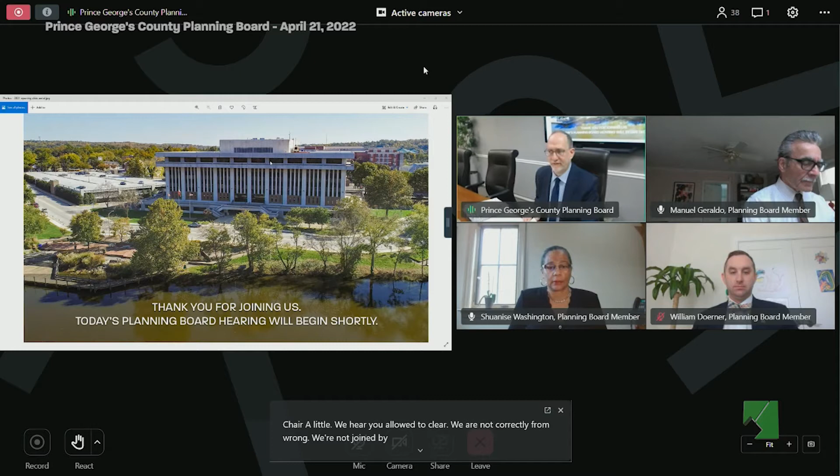We are not, correct me if I'm wrong, we are not joined by Vice Chair Bailey today, right? Okay.

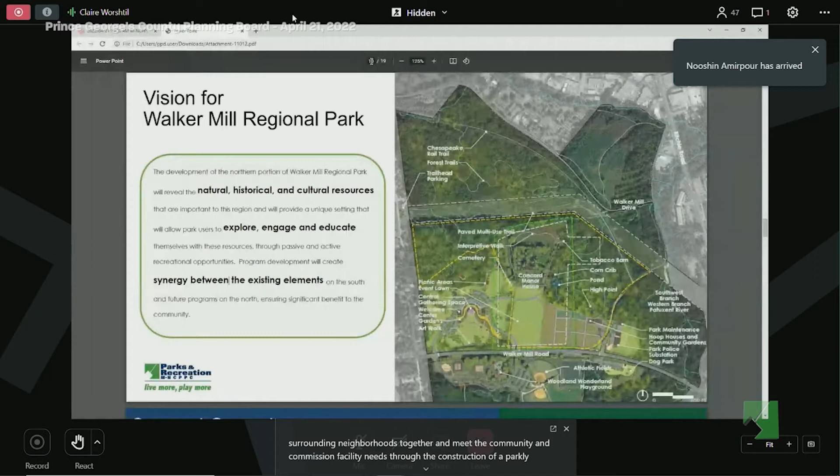We'll now talk a little bit more in depth about each zone. This is a rendering of a view from Walker Mill Road toward the historic Manor House and the grounds.

As per the protection of the Maryland Historic Trust easement, the master plan recommends maintaining the viewshed, but also enhances the visitor experience by renovating the house and other historic buildings on site, such as the corn crib and the stable, and creating a great lawn for future music and art events, as well as adding interpretive signage to tell the story of the people who once lived and worked at this location.

This is a rendering of the developable area of the western zone, which will be the most active part of the north side of the park.

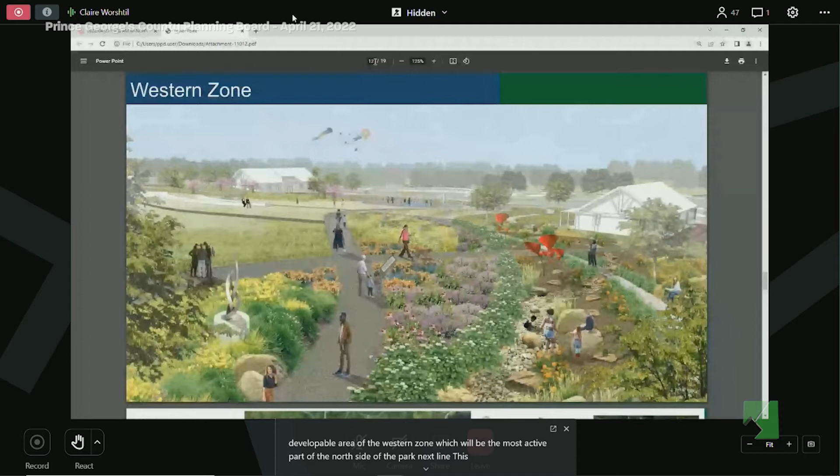This side will provide parking for the garden uses as well as the historic site. A welcome center and a small splash area will be surrounded by native gardens, children's gardens, an art walk, picnic pavilions, play spaces, and trails connecting this area to the rest of the park.

This is a rendering of the agricultural part of the eastern zone and shows urban agriculture at many scales, from community gardens to 1 acre to multi-acre plots.

This park will address the existing need and desire for local and urban agriculture, where the immediate community can learn techniques for larger scale farming and gardening with 1 to 3 acre plots or more in a more urban context. This model is currently being piloted at Watkins Regional Park, and there are opportunities here for farmers markets as well as educational activities and field trips.

This part of the park will also house a park police facility and maintenance facility. The community has requested a staff presence at this park, and the location inside the Beltway and close to Central Avenue provides operational efficiencies for our maintenance staff.

Walker Mill Road is a zone in itself. The roadway bisects the park, and bicycle and pedestrian safety is essential for the park's long-term success. We are envisioning a gateway to alert drivers that they are entering a park setting. Additional traffic calming measures like hawk signals and protected bicycle and pedestrian lanes are recommended, and the department has applied for a technical assistance grant to further study these measures, as this is a very keystone part of the plan.

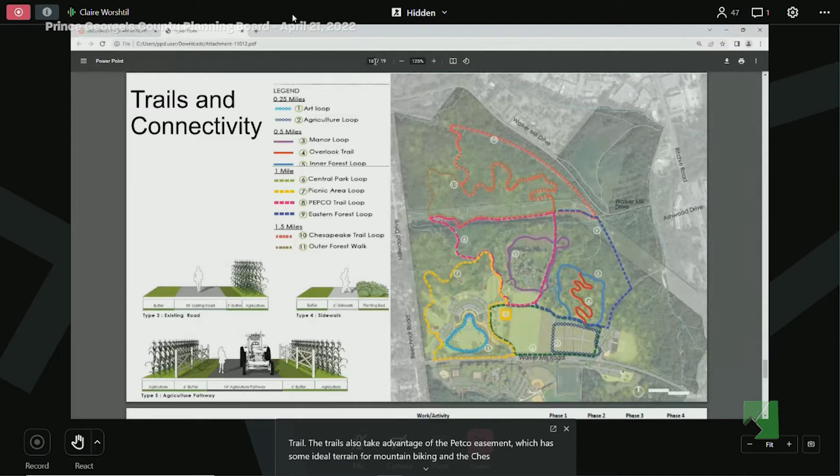Finally, the robust trail system is what ties all of this together. There are approximately 9 miles of new trail that will take users through the various sections of the park and connect to Walker Mill Road, Walker Mill Drive, and Central Avenue Connector Trail. The trails also take advantage of the Pepco easement, which has some ideal terrain for mountain biking, and the Chesapeake Beach Rail Trail goes through this site as well.

The plan breaks these improvements into 4 six-year phases, with the majority of the work happening in phases 1 and 2, so the first 12 years. Staff will further be refining the implementation plan in order to move into feasibility or design for certain aspects and make funding requests for others.

So thank you everyone for your time this morning, and we would love to answer any questions that you may have.

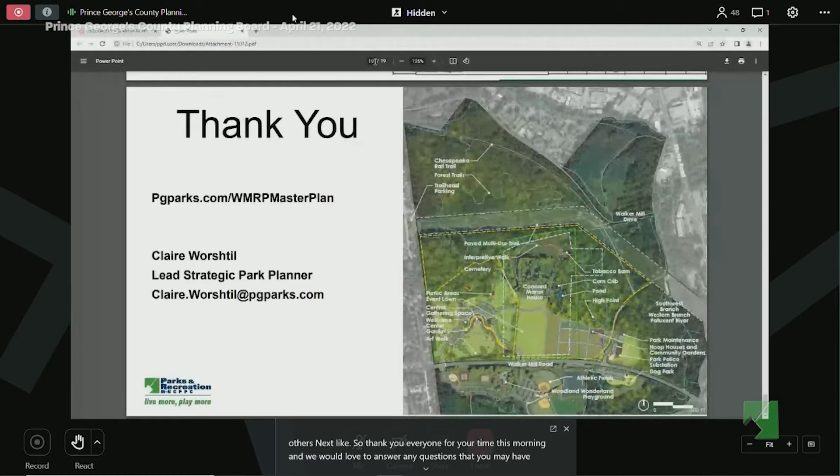Thank you, Ms. Worshtil. Let me turn to my commissioners and see if you have questions. Start with Commissioner Washington. I saw Commissioner Geraldo's hand go up. Oh, that's okay, Commissioner Washington could go first. No, I don't have any questions, but great job, team. Yes, it is a great job.

I have one question. So with the Chesapeake Beach Trail, that means you can walk from Watkins to Chesapeake Beach? Walker Mill. That trail is not completely finished. It exists in sections, so we would have a section of the Chesapeake Beach Trail that goes through this. But historically, it did go from Chesapeake Beach through Walker Mill and beyond. Okay, great, thank you.

Other questions? Commissioner Washington, Commissioner Doerner. Yeah, I have a few. I would say echo the comments of how great this is. And I think Commissioner Geraldo slipped up saying Watkins, because this is now going to rival Watkins Park in a lot of ways. This is great, this is really good. And it's awesome to see, especially like the Ninja course. I might have to shrink myself so I can participate on that once it's available.

I have 2 questions. One, I just want to know a little bit about the mountain biking reference, because we don't really have a whole lot of mountain biking opportunities in the county, and I want to know the plan for that. And then also on the agricultural plots, that looks fantastic to be doing this. I want to know if we're thinking about whether the production will be enough to potentially not just sell it in farmers markets, but also aid local schools, the county public school system, so we could have healthy options that come straight out of our parks and go on the tables for children in some of the school systems, or maybe it's more kind of smaller scale and more instructional.

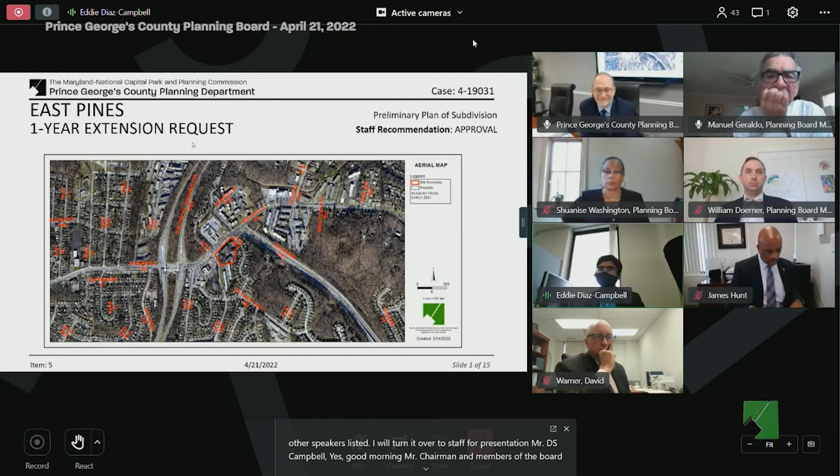Good morning, Mr. Chairman and members of the board. For the record, I am Eddie Diaz Campbell with the subdivision section. Item number 5 on the agenda is an extension request for preliminary plan of subdivision 4-19031 East Pines. This preliminary plan was approved by the planning board on May 28, 2020, and is valid through May 28, 2022. By letter dated February 14, 2022, the applicant requested a 1-year extension of the plan's approval. This is the applicant's first extension request. If approved, the preliminary plan will be valid through May 28, 2023.

The subject preliminary plan of subdivision approved 1 parcel to support development of 250 multifamily dwelling units and 25,000 square feet of commercial floor area. This preliminary plan was approved under the provisions of the prior zoning ordinance and subdivision regulations, and therefore, pursuant to Section 24-1704A of the subdivision regulations, extensions of time available under the prior subdivision regulations remain available. Section 24-119D of the prior subdivision regulations authorizes the planning board to grant an extension to the normal expiration of a preliminary plan of subdivision if certain criteria are met. For this preliminary plan, the criteria in Section 24-119D5A, Roman numeral 1 through Roman numeral 5, apply.

These criteria and their findings are listed in the staff memorandum. Staff found that all 5 criteria were met. Based on staff's findings and the project's eligibility for a 1-year extension as found in Criterion 5, staff recommends that the planning board grant a 1-year extension of preliminary plan of subdivision 4-19031 East Pines pursuant to Section 24-119D of the prior subdivision regulations. I do need to correct the record: the name of the applicant for this case is DGV Apartments LLC, not DVG Apartments as listed in the staff memo. This concludes staff's presentation.

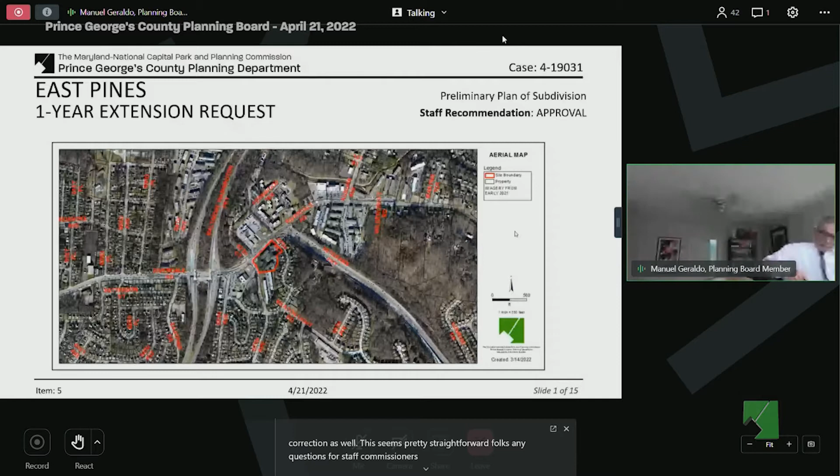Thank you for the presentation, and thanks for the correction as well. This seems pretty straightforward, folks. Any questions for staff, commissioners? No questions for staff. Let me turn it to the attorney for the case, Mr. Warner.

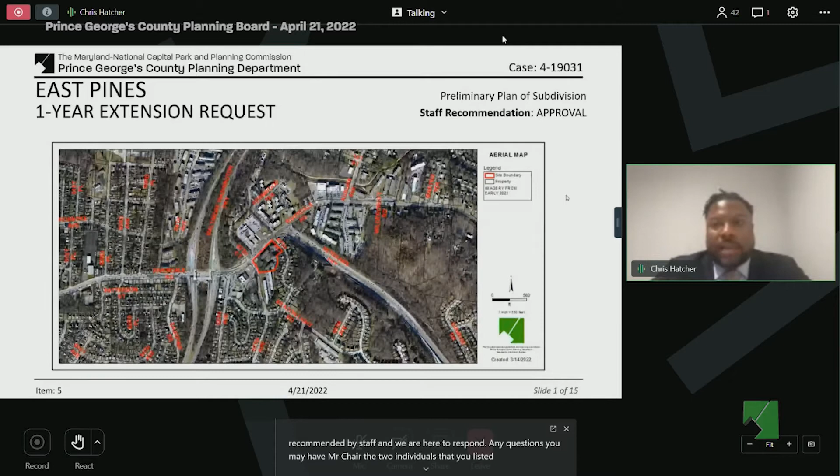Good morning, Mr. Chair, commissioners. For the record, my name is Chris Hatcher with CL Hatcher, with the office in Upper Marlboro, here on behalf of the applicant DGV Apartments LLC. I'd like to thank staff for working with us, and as you've seen in the staff report, this is a pretty complicated subdivision with assemblage of properties and requiring extensive coordination with MTA on the Purple Line location. With that, we respectfully request that the planning board approve the preliminary plan of subdivision extension as recommended by staff, and we are here to respond to any questions. Mr. Chair, the two individuals you listed are members of the applicant's team, and we're all here to respond to any questions, but don't necessarily need to say anything additional.

Great, thank you, Mr. Warner. Appreciate that. Are there questions for the applicant, for Mr. Warner? Hearing no questions. Are there any other questions from staff regarding this? Any further questions or anything to add? No, Mr. Diaz-Campbell, good to go. Okay, hearing no further questions from commissioners, I will look for a motion.

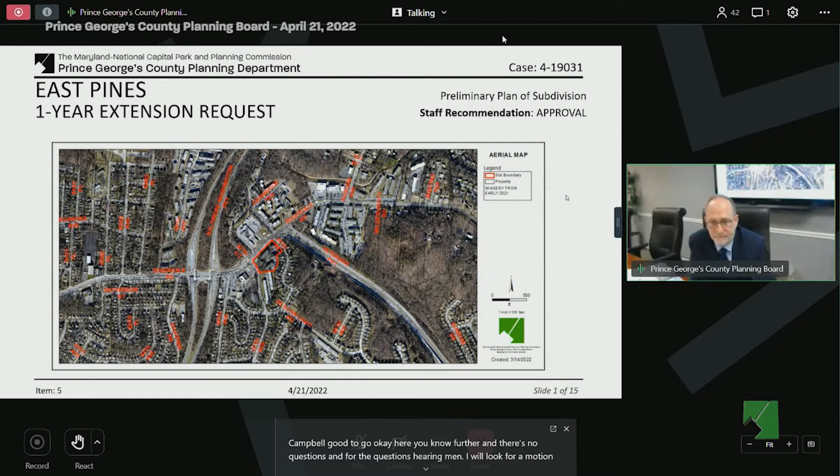Mr. Chairman, I move that we accept the recommendation of staff and approve the one-year extension for preliminary plan 4-19031. Thank you, we have a motion. Is there a second? I'll second the motion, noting the correction staff made regarding the name of the applicant. Thank you. We have a motion by Commissioner Washington, seconded by Commissioner Geraldo, with a notation to reflect the accurate name. Is there any discussion on the motion?

Hearing none, let me call the roll. Commissioner Washington votes aye. Commissioner Geraldo votes aye. Commissioner Doerner votes aye. And I vote aye as well. The ayes have it, 4-0. Thank you, Mr. Diaz-Campbell. Thank you, Mr. Warner.

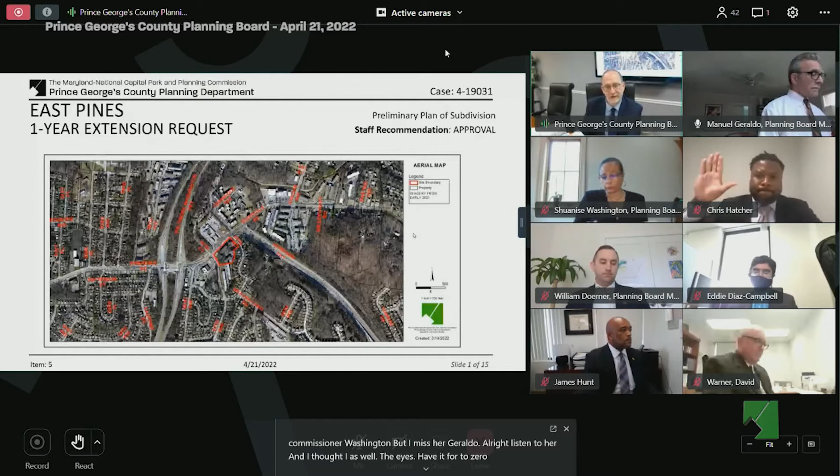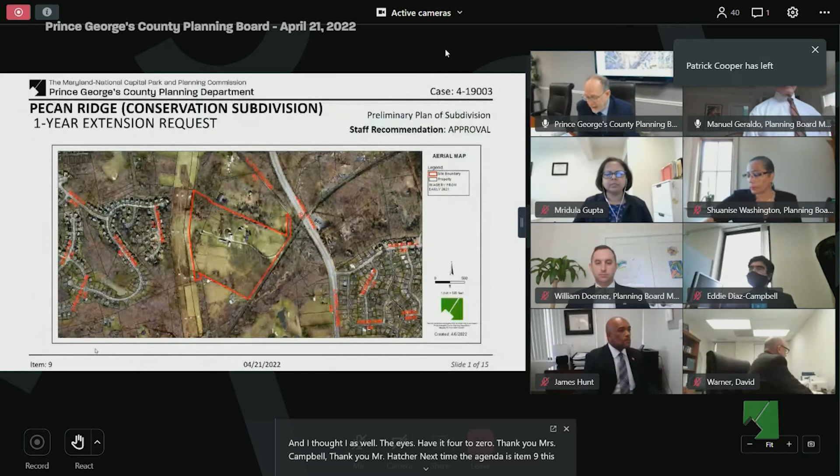Next item on the agenda is item 9. This is an extension request for a preliminary plan, 4-19003, Pecan Ridge Conservation Subdivision. Participating in this case is Mridula Gupta, and the attorney for the applicant is Ed Gibbs and Haller. We have additional speakers listed as well, who I assume are with the applicant team: Mr. Cintron, Mr. Villegas, and Mr. Howe. Let me turn it over to Ms. Gupta to begin the presentation.

Good morning, Mr. Chair and members of the board. For the record, I'm Mridula Gupta with the subdivision section. Item number 9 on the agenda is an extension request for preliminary plan of subdivision 4-19003, titled Pecan Ridge. This conservation subdivision was approved by the planning board on February 20th, 2020, and it is valid through March 12th, 2022. The applicant requested a one-year extension of the plan's approval, and if approved, the preliminary plan of subdivision will be valid through March 12th, 2023. This is the applicant's first extension request. The subject preliminary plan of subdivision approved 80 lots and 8 parcels for the development of 80 single-family dwelling units.

Section 24-1704A of the subdivision regulations states that subdivision approvals of any type remain valid for the period of time specified in the subdivision regulations under which the subdivision was approved. Extensions of time which were available under those subdivision regulations shall remain available. Preliminary plan of subdivision 4-19003 was approved under the prior subdivision regulations, and section 24-119D of the prior subdivision regulations authorizes the planning board to grant an extension to the normal expiration of a preliminary plan of subdivision if certain criteria are met. For this preliminary plan, the criteria under section 24-119A, Roman numeral 1 through Roman numeral 5, apply. These criteria and their findings are listed in the staff memorandum. Staff found that all 5 criteria were met. Based on staff's findings and the eligibility of a one-year extension as found in criterion 5, staff recommends that the planning board grant a one-year extension for preliminary plan of subdivision 4-19003, Pecan Ridge, pursuant to section 24-119D of the prior subdivision regulations. This concludes staff's presentation. Thank you.

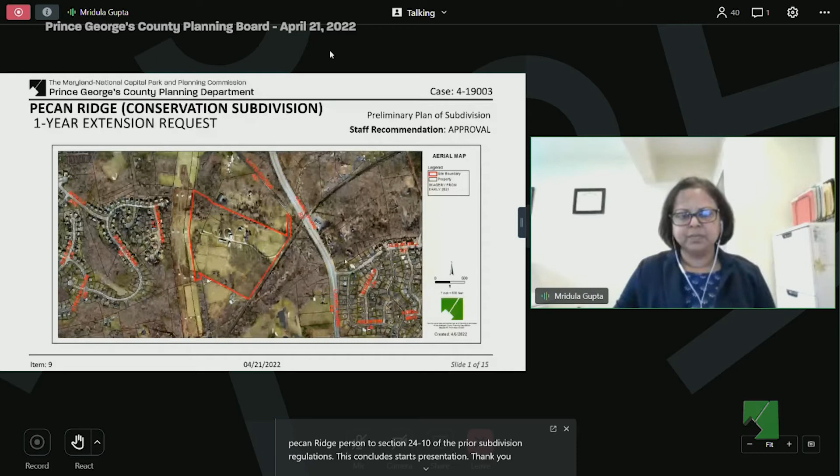Thank you, Ms. Gupta, for the clear presentation. Staff recommendation is to approve the extension. Questions from commissioners? Anything from my fellow board members? Pretty straightforward, no questions. Let me turn it over to the representative of the applicant, Mr. Gibbs.

Good to see you, Mr. Gibbs. Yes, good morning, Chair Shapiro. I have obviously appeared before you on many occasions when you were on the County Council, and it's a pleasure to be before you today. Congratulations and welcome. This is obviously my first appearance before the board since you became the new chair. So thank you very much.

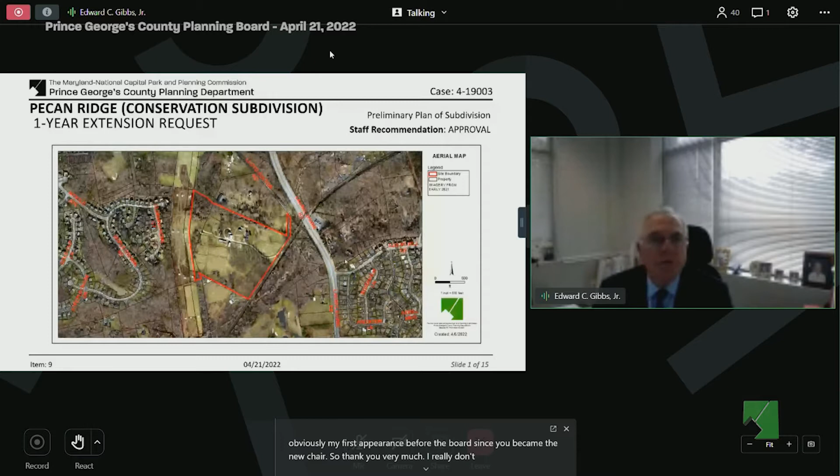I really don't have anything further that I could add. Everything is in the staff report and in our supporting documents. I do want to thank the staff for working with us on this, and very much appreciate the staff recommendation of approval. In particular, I'd like to thank Ms. Sherry Connor and your attorney, Mr. David Warner. So thank you very much. I have a number of people signed up. They're all part of either the applicant themselves or the applicant's team, and they have nothing further to say unless there are any questions. So thank you very much.

Thank you, Mr. Gibbs. Again, this is pretty straightforward, and I think for the public, I would say sometimes when cases like these feel so straightforward, we forget how much work is involved on the staff side in collaboration with the applicant to get us to the point where there are no issues of substance before us. So I recognize that, and I think I can speak for all my fellow board members in recognizing all the work that goes on behind the scenes. Are there questions for the applicant, for the attorney, from any of my fellow board members? Seeing none, let me look for a motion.

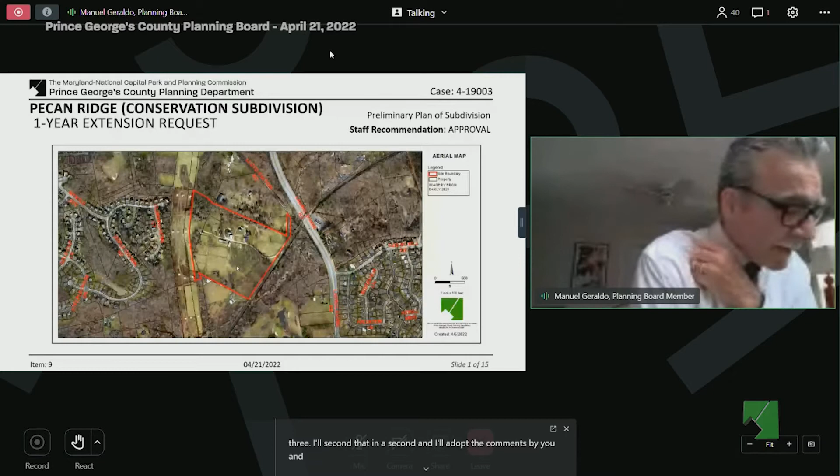Well, Mr. Chairman, I'll first associate myself with your comments and thank the team, because you're right, there is a lot of work that goes into this. And with that, I move that we adopt the recommendation of staff and approve the one-year extension for preliminary plan 4-19003. I'll second that and adopt. I'll second it, and I'll adopt the comments by you and by Commissioner Washington. Thank you. We have a motion by Commissioner Washington, second by Commissioner Geraldo. Any further discussion on the motion? Hearing none, I will call the roll.

Commissioner Washington. I vote aye. Commissioner Geraldo. I vote aye. Commissioner Doerner.

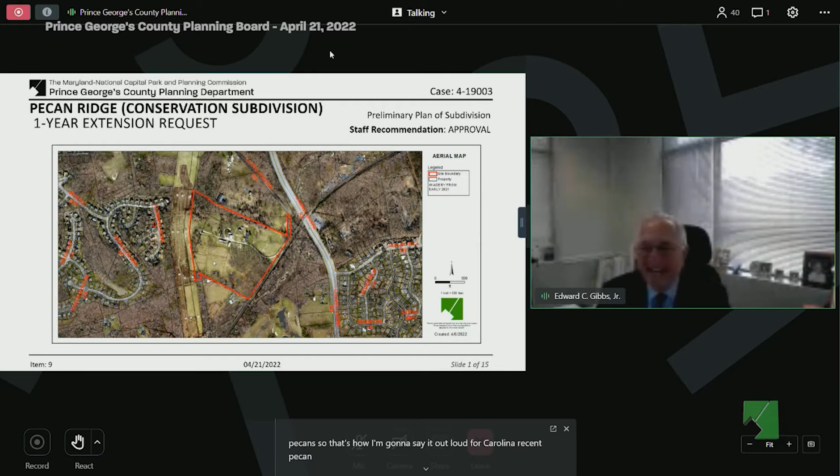Vote aye for Pecan Ridge, is how I would say it. I'll also note you can say pecan, pecan, or pecan. There's actually three recognized ways depending on where you are. It's not even north versus south, it's a distinction between the Carolinas and the Georgia, northern Florida areas. I'm always used to saying pecan, so that's how I'll say it. Well, I'm from South Carolina, and we say pecan.

Since you had to go there geographically, Commissioner, I think we have our first item for our commissioners retreat to debate, so we'll take this up another day. But thank you. So I vote aye as well. The ayes have it, 4-0.

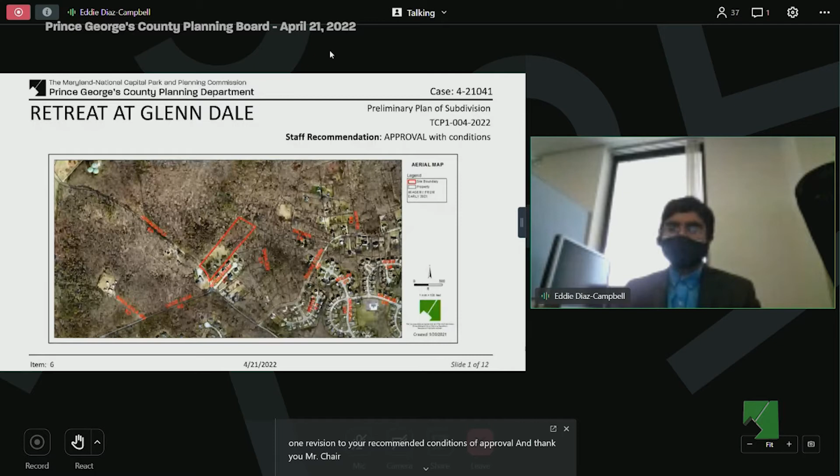The subject project proposes 13 lots for the development of 13 single-family detached dwellings. As a matter of housekeeping, staff has received one item of additional backup, received before the noon deadline on April 19. This is a letter from the applicant requesting one revision to the recommended conditions of approval. Thank you, Mr. Chairman, for noting that. Next slide, please.

Can I hold you right there? Because I believe we have two records. I'm not sure that it matters, but I have that as well. Yes, two items, the other one being the rendering. Excuse me, thank you, Mr. Gaskell. Keep going.

The site is located in the northern part of Prince George's County within Planning Area 71A and Council District 4. Next slide, please. More specifically, the site is located on the north side of Springfield Road, approximately 115 feet northwest from the intersection of Springfield Road and Good Luck Road. Next slide, please.

The zoning map shows that the property is in the rural residential, or RR zone. To the east are developed and undeveloped prior subdivisions also in the RR zone. To the south, across Springfield Road, is a parcel zoned RR, the site of the historic Perkins Chapel and other places of worship. Further south are residential subdivisions in the residential estate, or RE zone. To the west and north is the Patuxent Research Refuge in the reserved open space, or ROS zone. Next slide, please.

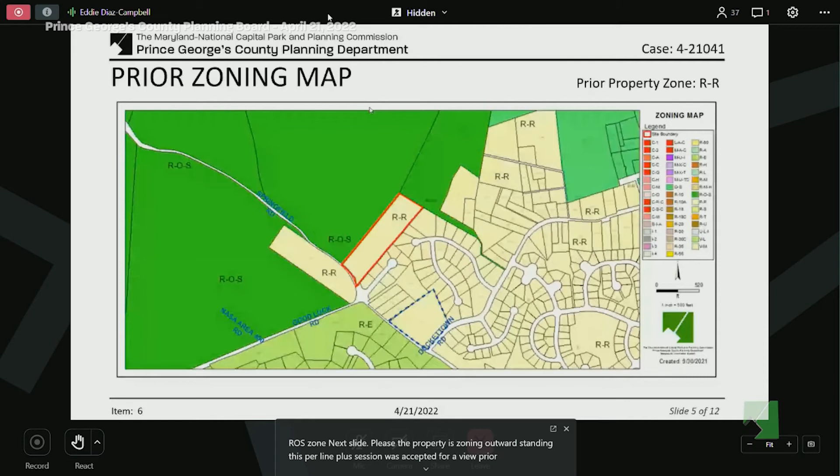The property zoning notwithstanding, this preliminary plan of subdivision was accepted for review prior to April 1, 2022, and is therefore reviewed under the prior zoning ordinance and subdivision regulations, pursuant to Section 24-1703A of the subdivision regulations. Under the prior zoning ordinance, this site was also in the RR zone. This preliminary plan of subdivision was therefore evaluated according to the former standards of the RR zone rather than the current standards. Next slide, please.

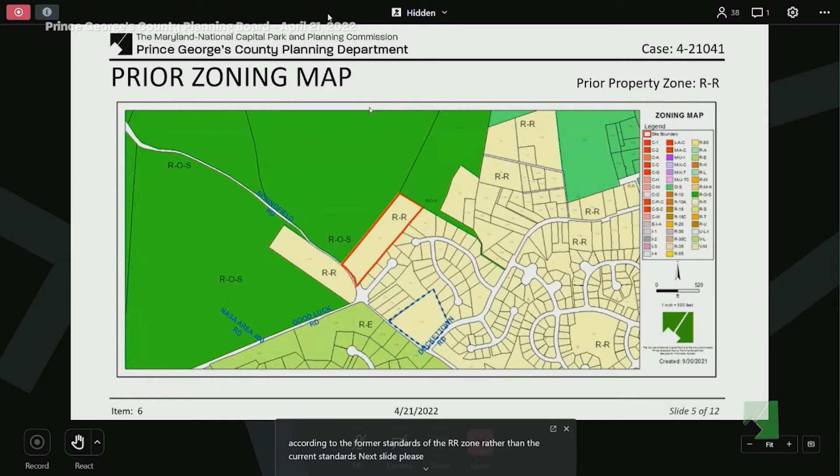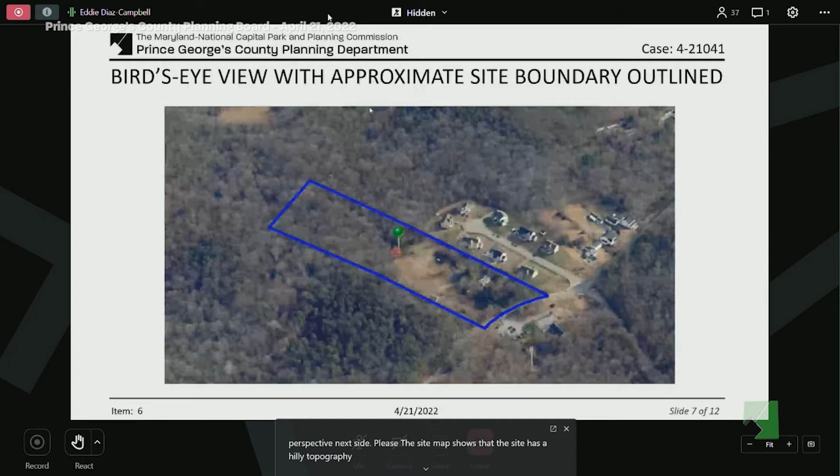The analysis performed by staff found that these intersections would operate adequately under total traffic conditions. Next slide, please.

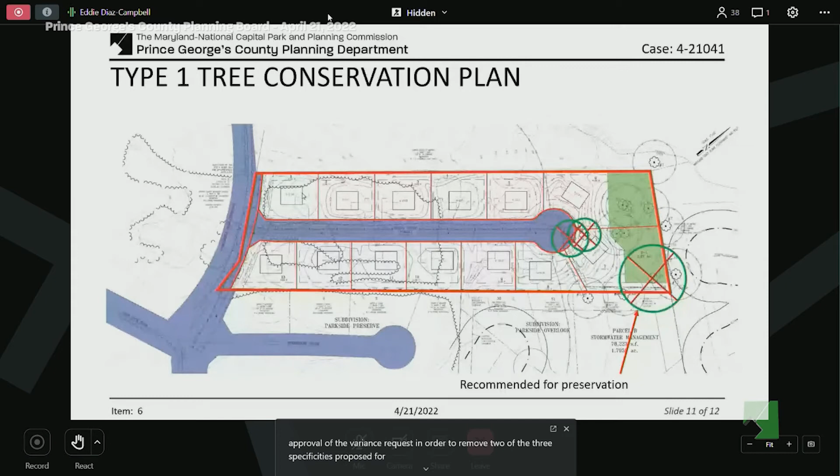Next slide, please. In conclusion, subdivision staff recommends that the planning board adopt the findings and approve preliminary plan of subdivision 4-21041 Retreat at Glenn Dale, as well as Type 1 tree conservation plan TCP1-004-2022, and a variance from section 25-122B1G for removal of 2 specimen trees, subject to conditions contained in the staff report.

The applicant has communicated 1 proposed revision to conditions of approval recommended in the report, which is included on the record. The purpose of this revision is to delete the requirement that an approved stormwater management concept plan be submitted prior to certification of the preliminary plan. Because no regulated environmental features will be affected by the stormwater facilities shown in the plan, staff agrees that the approved stormwater management concept plan may be submitted prior to approval of a Type 2 tree conservation plan, which is a standard requirement. Staff concurs with the applicant's proposed revision.

The associated findings in the staff report will be revised for the resolution. This concludes staff's presentation.

Thank you, Mr. Diaz-Campbell. Are there questions for staff on this case? And just to be clear, what you're recommending is approval, but with 1 change to the conditions. That's it, which you just described.

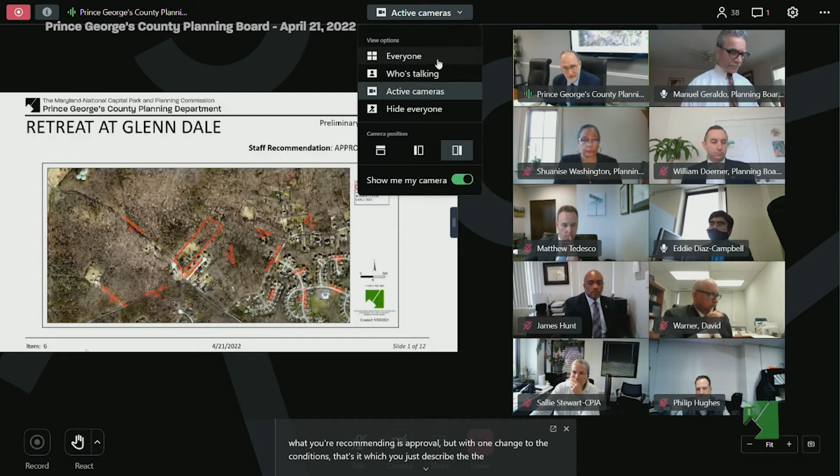The 3rd specimen tree, is that a separate recommendation? So the staff report recommends partial approval of the variance, so that recommendation from the staff report does not need to change. But yes, there's 1 condition from the staff report not related to the variance, which staff is recommending deletion of for the applicant's request.

Thank you, Mr. Diaz-Campbell. So let me turn to my fellow commissioners with any questions. I have none. Commissioner Washington, Board Member Doerner, no questions?

No questions. I'll just point out that what Mr. Diaz-Campbell was saying is that one of the recommendations in the list in the staff report actually says preserve that specimen tree. So that's why it's a partial recommendation of approval of the variance. Okay, thank you for that. It's already covered in there. All right, thanks for that. Appreciate it. Okay, no questions for staff.

Let me turn to the attorney for the case, Mr. Tedesco. Good morning, Mr. Chairman. It's a pleasure to be before you. Good morning, fellow commissioners and staff. Mr. Chairman, let me take this opportunity. This is my first appearance before you after your recent appointment. I just want to say congratulations and echo my colleague, Mr.

Gibbs's sentiments with welcome, and it's nice to have you. I also want to thank Mr. Diaz-Campbell for his review of this application, his excellent staff report and his presentation this morning, as well as the environmental planning staff who worked with us on this application.

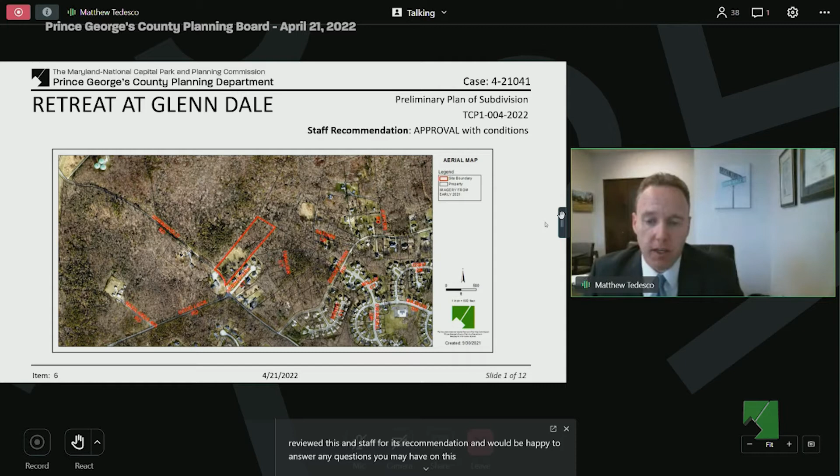Thank you, Mr. Tedesco. Let me turn it over to my colleagues to see if you have any questions. I have no questions. No questions, thank you. Ms. Doerner, no questions? No questions. Thank you, so we have no questions, and I as well have no questions.

This feels pretty straightforward. You were aligned with staff. There's one change to conditions, and staff is in agreement with that. If there's nothing else, Mr. Tedesco, let me turn to my commissioners for a motion.

Mr. Chairman, I move that we adopt the findings of staff and approve preliminary plan 4-21041 and TCP 1-004-2022, partial approval of variance to section 25-122B1G, covering the two specimen trees.

As communicated by staff, along with the associated conditions, and as further modified by applicant exhibit number 1, and would also ask that we incorporate in the adoption the modified findings as outlined by staff related to the deletion of condition number 8.

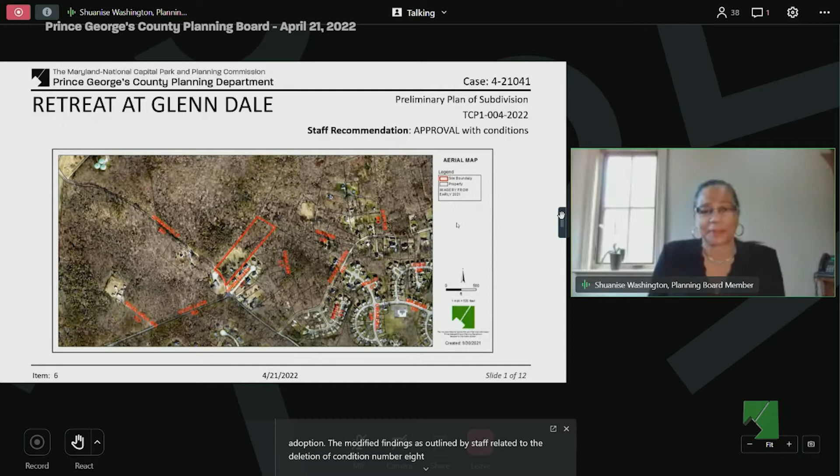Second. Thank you. We have a motion by Commissioner Washington, a second by Commissioner Geraldo. Any discussion on the motion? Hearing none, I will call the roll.

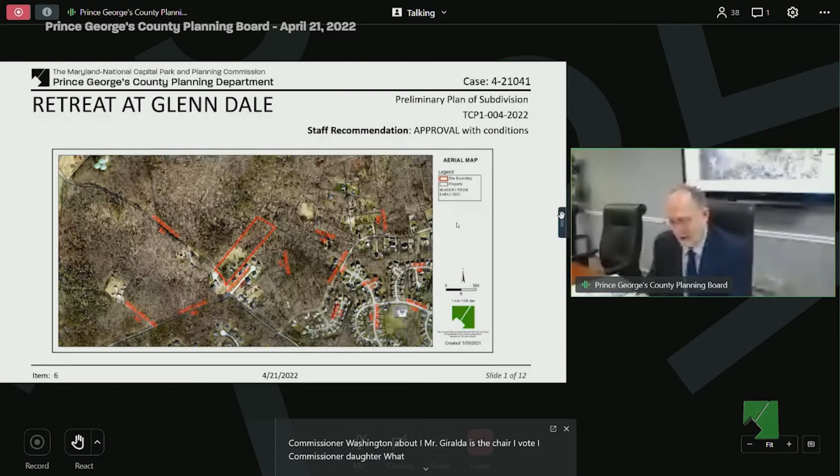Commissioner Washington votes aye. Commissioner Geraldo, Mr. Chair, I vote aye. Commissioner Doerner votes aye, and I vote aye as well. The ayes have it, 4-0.

Thank you, Mr. Diaz-Campbell. Thank you, Mr. Tedesco and team. Thank you, Chairman. Commissioners, do we need a break? Are you okay for a few minutes? Are you okay?

All right, good. Okay, so the next item is item 8. This is a preliminary plan of subdivision 4-21032, Hyattsville Crossing.

Participating in this case is Mr. Diaz-Campbell again, and for the applicant we have attorney Tom Haller. I'm present, Mr. Chairman. Thank you. We have some proponents as well. I'm assuming these are members of the applicant's team, though there's a representative of the city of Hyattsville, Taylor Roby. The other proponents are Mr. Bickle, Mr. Gingles, Mr. Lenhart, and Ken Dunn with Soltez.

Mr. Haller, do you want the representative of the city of Hyattsville to speak first, or should I turn it to you to take it away? No, I'll speak after Mr. Diaz-Campbell provides the staff presentation. I'm sorry, I skipped ahead. Let me turn to Mr. Diaz-Campbell, who will give the staff presentation first. Thank you.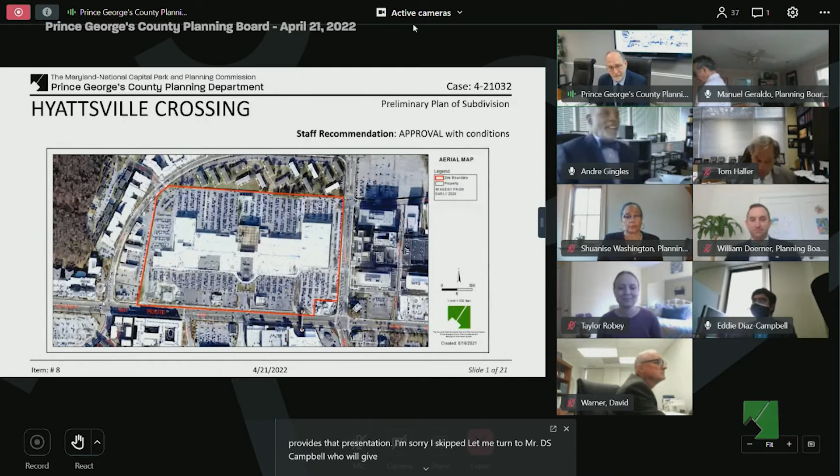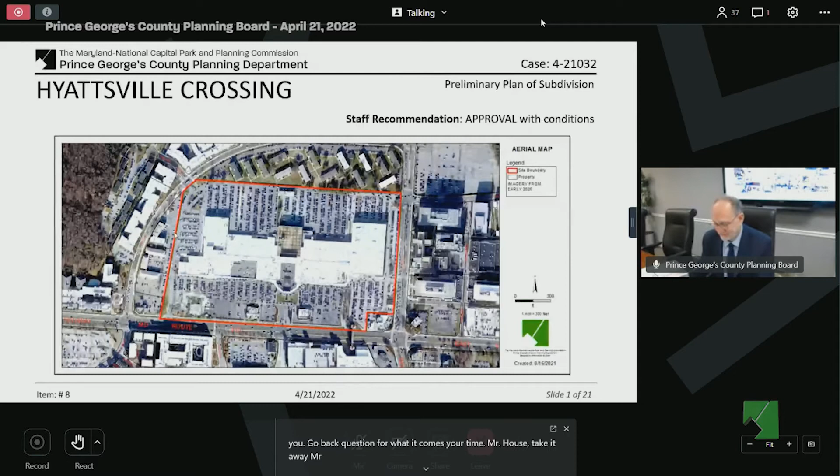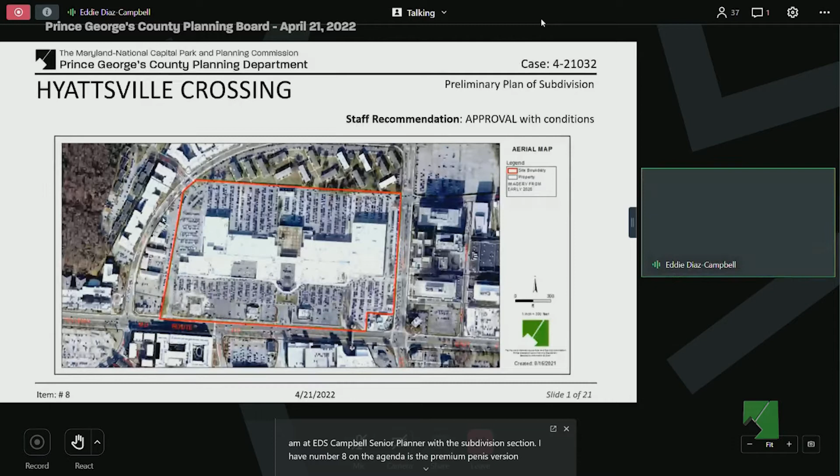Thank you, Mr. Chairman. For the record, I am Eddie Diaz-Campbell, Senior Planner with the Subdivision Section. Item number 8 on the agenda is the preliminary plan of subdivision for Hyattsville Crossing, 4-21032. The subject project proposes 3 parcels for 380 multifamily dwelling units, as well as 1,068,471 square feet of commercial floor area to remain.

The property is the site of the Mall at Prince George's, and there are specific recommendations for the site given in the 2016 Prince George's Plaza Transit District Development Plan, which will be discussed in this presentation. As a matter of housekeeping, staff received one item of additional backup, which was received before the noon deadline on

May 19. This is a letter from the applicant requesting revisions to the recommended conditions of approval. Though staff is not in agreement with the revisions requested in this letter, following its submittal, staff and the applicant did reach agreement on an alternative set of revisions, which I will read into the record at the end of this presentation. Next slide, please.

The site is located in the northwestern part of Prince George's County, within Planning Area 68 and Council District 2. Next slide, please.

More specifically, the site is located on the north side of Maryland 410 between Toledo Terrace and Belcrest Road. Next slide, please.

The zoning map shows that the property is in the core area of the Regional Transit-Oriented High Intensity Zone, or RTOHC zone. The property is surrounded by other properties that are similarly zoned RTOH, with properties in the core area shown in dark blue on this slide, and properties in the edge area, or RTOHE, shown in light blue. Next slide, please.

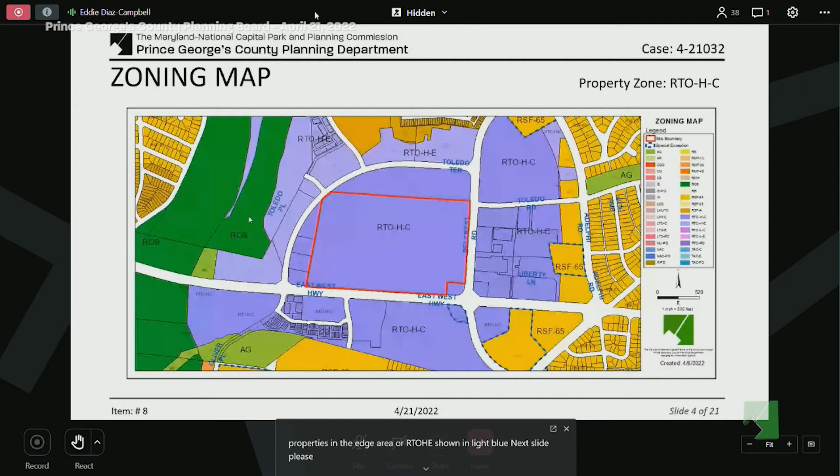The property zoning notwithstanding, this preliminary plan subdivision was accepted for review prior to April 1, 2022, and is therefore reviewed under the prior zoning ordinance and subdivision regulations, pursuant to Section 24-1703A of the subdivision regulations. Under the prior zoning ordinance, this site was in the mixed-use infill, or MUI zone. This preliminary plan subdivision was evaluated according to the standards of that zone.

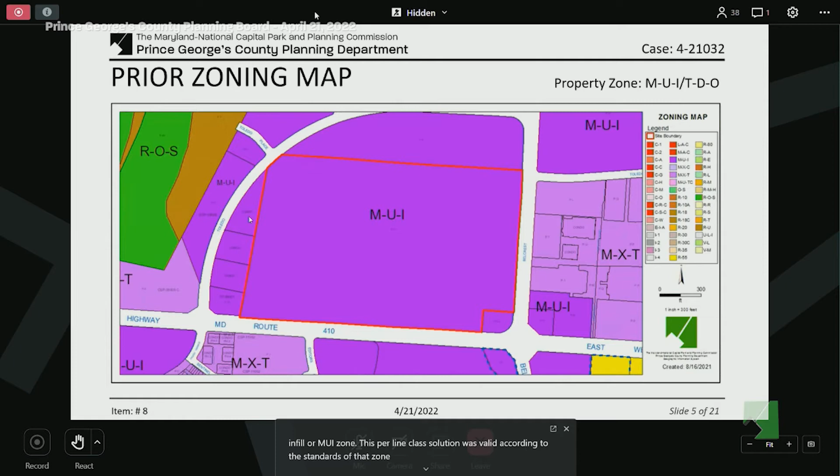Next slide, please. Under the prior zoning, the property was also in the Transit District Overlay Zone, or TDO, associated with the 2016 Prince George's Plaza Transit District Development Plan. The TDDP includes design standards for the TDO, which will be discussed further in this presentation. Next slide, please.

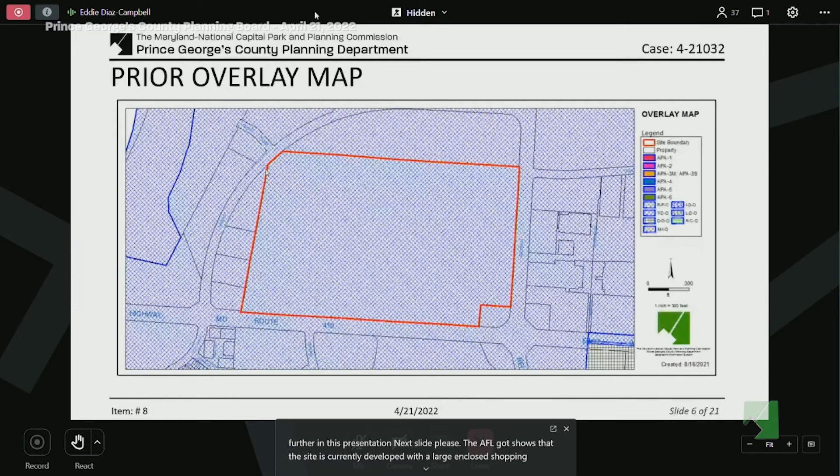The aerial photograph shows that the site is currently developed with a large enclosed shopping mall and several pad sites and outbuildings. As part of the proposed development, the applicant will raze the northernmost building, former auto center, and part of the mall building, the former J.C. Penney's, for a total of 60,546 square feet of commercial gross floor area to be removed, resulting in the 1,068,471 square feet of commercial floor area to remain. The aerial photograph also shows the uses surrounding the property.

The master plan right-of-way map shows Maryland 410, an arterial road, and Belcrest Road, a collector road, and Toledo Terrace and Toledo Road, which are primary roads. These roads are included in the 2009 Master Plan of Transportation. No right-of-way dedication is required for any of these existing roadways.

In addition to those roads listed in the 2009 MPOT, the 2016 TDDP amended the MPOT to include a master plan local municipal road known as Toledo Road Extended, which is shown by the black dotted line on this slide. The TDDP specifies that this road is located on the north side of the mall property. It also specifies that the road is intended to formalize the existing drive aisle in this location, which connects between the mall entrance at Belcrest Road to the east and the mall entrance at Toledo Terrace to the west.

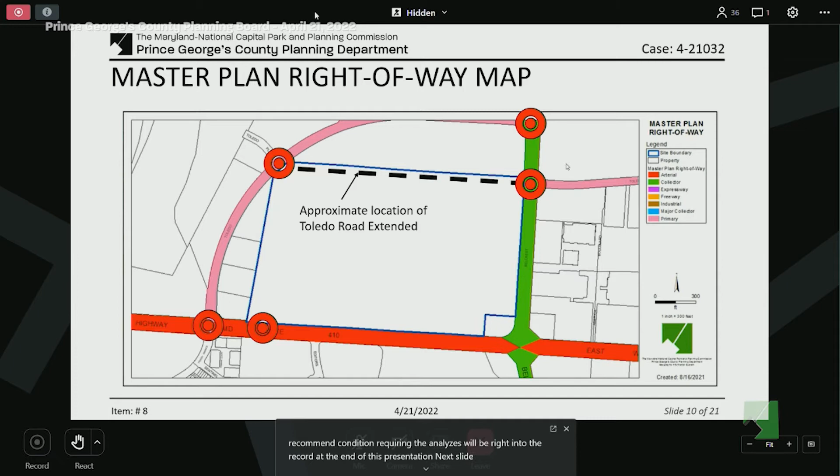The first easement wraps south around Parcel 2 in order to serve Parcel 3. The second extends across the northern boundary of the site to ensure Parcel 2 is served from both the northeast and northwest site entrances. As previously discussed, the second easement needs to be modified to cover the existing drive aisle, and it will ultimately be replaced by public right-of-way once future development improves Toledo Road Extended to a public standard along its full length and the City of Hyattsville is ready to accept dedication.

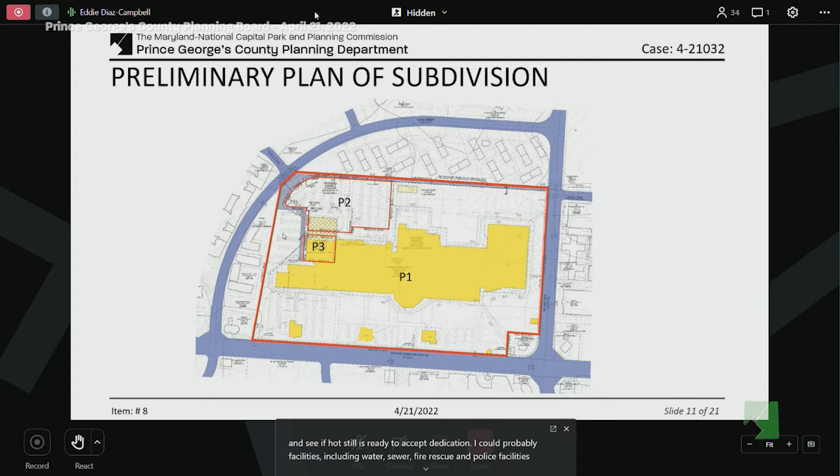However, Section 24-121A3 of the prior subdivision regulations requires that when lots are proposed on land adjacent to an arterial road, they shall be designed to front on an interior street or service road. No interior streets or service roads are proposed, so the applicant filed a variation request from Section 24-121A3 to allow the existing access points to remain.

Staff recommends approval of this variation request, as described in Finding 7 of the staff report.

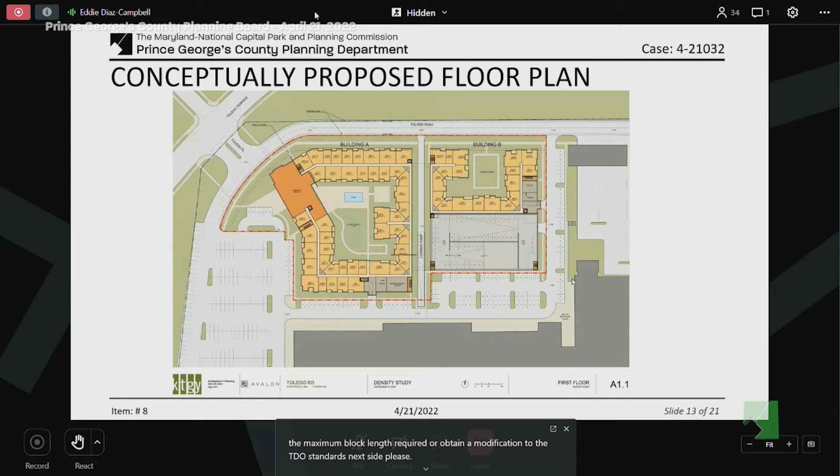This slide shows the conceptually proposed building massing from the northeast.

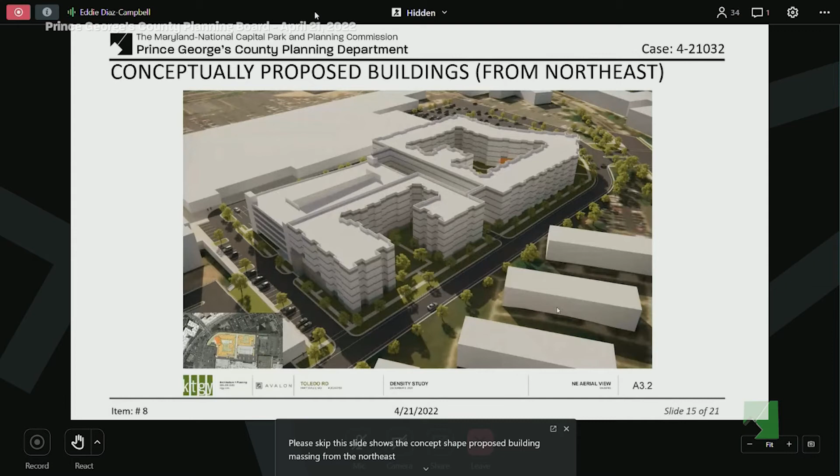Because residential development is proposed, mandatory dedication of parkland is required with the preliminary plan application, pursuant to Section 24-134 of the prior subdivision regulations. The applicant is proposing to meet the requirement with private on-site recreational facilities within the multifamily buildings, as permitted by Section 24-135B.

The TDDP also includes specific recommendations for Toledo Road Extended, which are illustrated with the street section on this slide. The TDDP envisions Toledo Road Extended as a two-lane roadway with on-street parking and bike lanes. However, it also stipulates that the facilities provided between the curbs are at the discretion of the City of Hyattsville.

The TDO requires a frontage zone on either side of the roadway, which must be a minimum of 20 feet in depth, and include within that depth a buffer zone, tree and furniture zone, sidewalk clear zone, and retail zone. Where no retail zone is proposed along the street, as is the case here, the retail zone is simply the remaining area between the clear zone and the building facade.

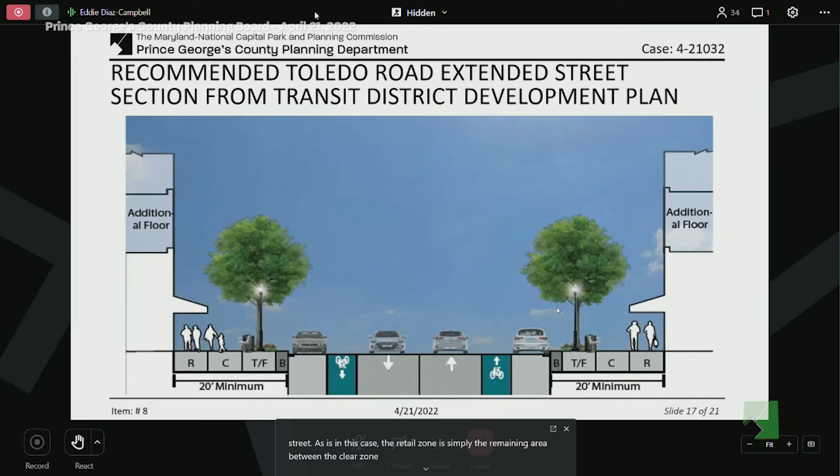The frontage zone, with the staff recommended modifications, will include all of the subzones required by the TDO. The applicant may still request a reduction in the minimum frontage zone depth at the time of detailed site plan from 20 feet to 18 feet, and if so, this street section will be able to accommodate such a reduction.

With this project, the street section shown here will be established only for the frontage of the new multifamily buildings on Parcel 2. However, staff expects that this street section will also be used for future development along Toledo Road Extended, east of the multifamily buildings.

Redevelopment of the property to the north of the mall will have to provide the frontage zone on the north side of Toledo Road Extended, and as such redevelopment may also provide additional width to the travelway.

Because the new street section will only be established for the frontage of the new multifamily buildings on Parcel 2, the applicant has proposed, and staff has recommended, additional interim improvements to Toledo Road Extended on Parcel 1 in order to ensure functionality of the roadway, while redevelopment of the rest of the road is still in the future.

The applicant proposed changes to the stop signs near the northwest entrance, and staff has recommended sharrows along the roadway where the bike lane is not yet to be implemented. Staff has also recommended that all existing center lines, speed bumps, and crosswalks be restriped.

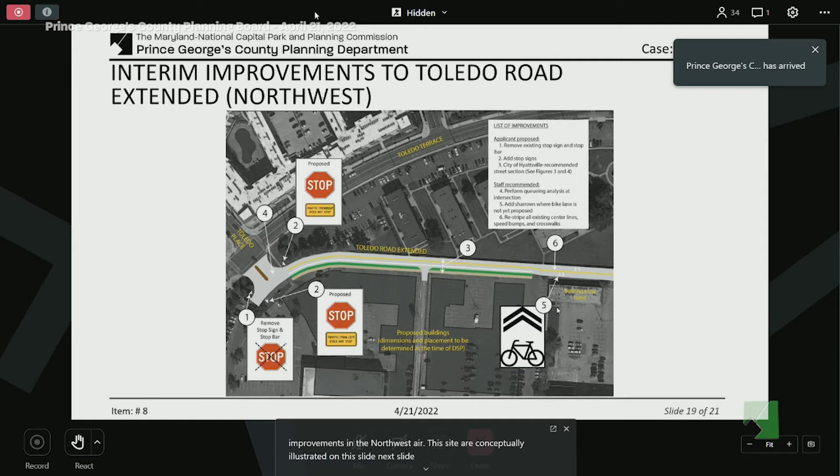The staff recommended improvements in the northwest area of the site are conceptually illustrated on this slide. Note that the sharrows on Parcel 1, the bike lane in front of Parcel 2, and the frontage zone on Parcel 2 are also recommended to meet the requirements of on-site bicycle and pedestrian adequacy in centers, pursuant to Section 24-124.01 of the Prince George's County Subdivision Regulations.

Off-site improvements for bicycle and pedestrian adequacy required by Section 24-124.01 have also been proposed by the applicant and are found acceptable by staff. I will read a modified condition to the record which addresses all the required off-site and on-site BPIS improvements.

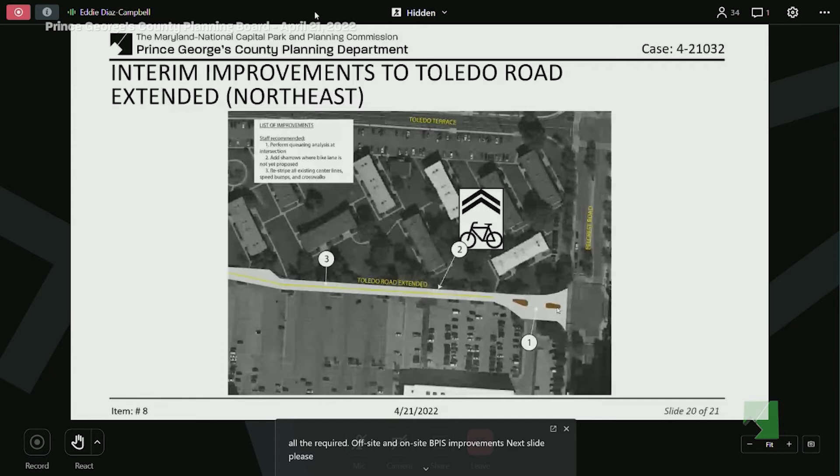In conclusion, subdivision staff recommends that the planning board adopt the findings and approve preliminary plan subdivision 4-21032 Hyattsville Crossing, as well as a variation from Section 24-121A3, subject to conditions contained in the staff report.

The applicant communicated proposed revisions to the conditions of approval recommended in the report, which are included on the record. As stated in the beginning of this presentation, staff was not in agreement with all of the proposed revisions. However, staff and the applicant worked to determine additional revisions which were acceptable to both the applicant and staff. I will read those into the record now.

Staff recommends that Condition 1A read as follows. 1. Prior to signature approval of the preliminary plan of subdivision, the plan shall be revised as follows. A. Increase the width of the public access easement along the northern border of Parcel 2 from 25 feet to 38 feet. The public access easement on Parcel 1 shall be expanded or modified as needed to ensure the existing interim drive aisles from Belcrest Road to Parcel 2 are also encompassed by the easement. The area of future dedication to the City of Hyattsville may remain delineated at 25 feet wide.

Condition 10 should read as follows. Prior to approval of building permits for residential development, the applicant and the applicant's heirs, successors, and/or assignees shall submit a performance bond, letter of credit, or other suitable financial guarantee for construction of recreational facilities. Note that that is the language that's in the staff report. Staff simply deleted the applicant's requested edit to this condition.

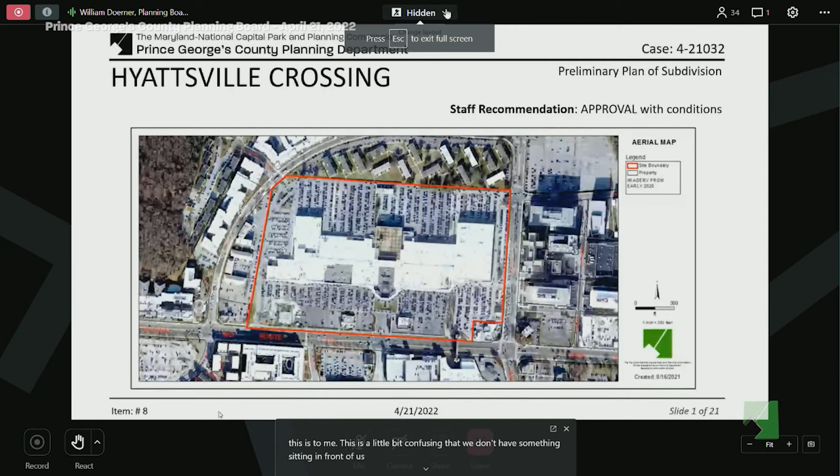Yeah, I do. Just to clarify, because I think this was a little bit confusing that we don't have something sitting in front of us. I'm looking at a little tablet screen and trying to go back and forth between the slides and the staff report, the staff slides, and applicant exhibit 1.

So I just want to be clear that in striking condition 13B, or sorry, 13C, D, E, and F, those are now subsumed into 13B as 1, 2, and 3, right? Yes, all of the condition 13 C, D, E, and F requirements have essentially been relocated into other conditions. Okay, and then condition 13C originally is now 13A3, I think? Correct, Roman numeral 3.

And going on to condition 15A, which was eliminated, I don't think that was actually put back in anywhere, or am I wrong? And if I'm correct, then why was it struck, or why does staff feel that it's not necessary now? So yes, that one was not put back in. That one was replaced with the new recommended condition 14, which is the recommendation for the queuing analyses. So essentially, the raised triangle island may be the correct solution for that intersection, but the applicant would like a chance to determine if there is another solution that would work, and we are willing to give them the chance to make that analysis.

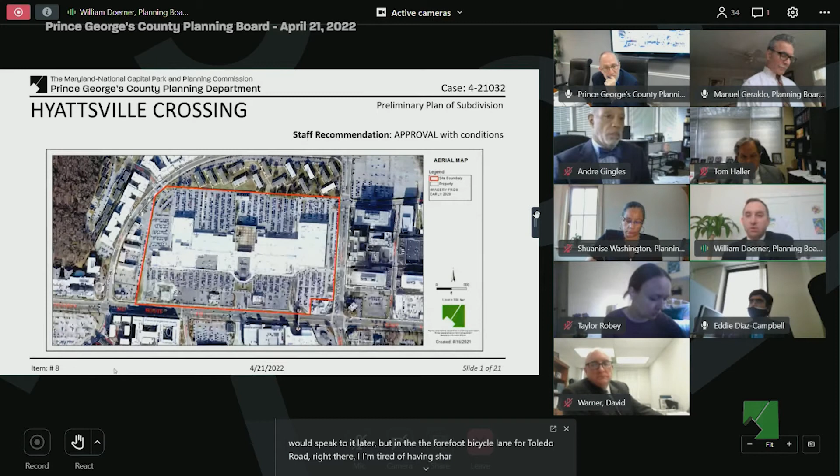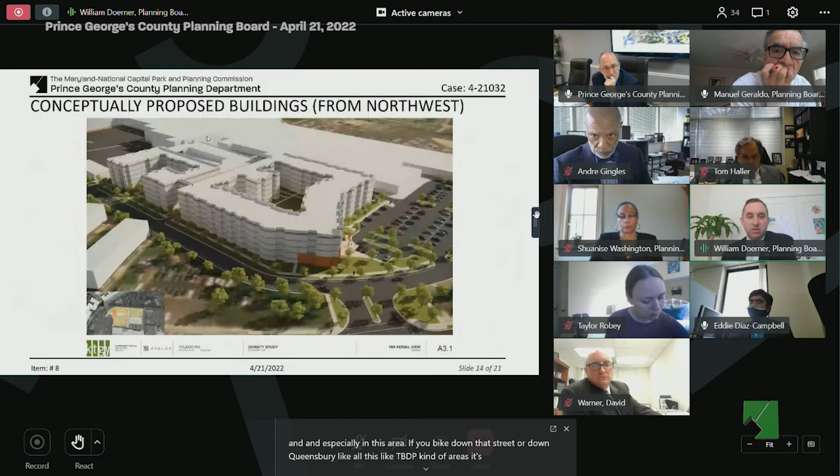Okay, so then my only other request, and I don't know if you would clarify it or if the applicant would speak to it later, but in the 4-foot bicycle lane for Toledo Road right there, I'm tired of having sharrows that are unprotected, and especially in this area. If you bike down that street or down Queensbury, like all these TDDP kind of areas, it's extremely dangerous as a biker, you're going to get clipped. People have come right next to me as I've been biking, even with my son on my bike behind me, and come extremely close. So I'm tired of just having unprotected sharrows there.

I want to see painting on this area, on the street, and I would like to see—it's extremely easy—some kind of a barrier, whether it's a couple inches where you've got kind of the plastic reflectors like on the street, the white plastic reflectors that a car could run over without getting damaged if it hits them, but that provides a visual distinction between the bikes within there.

And I know that conflicts a little bit with the slide that's up here, because if you have those reflectors that are risen, if you're driving over them to park, you would run right over those reflectors. But I'm positive we can figure out a way to have less obstructions in there that would also protect bikers from getting killed in this area.

Because as we put more and more residential in here, and I assume this mall parking lot is going to redevelop in other ways as well, like has been envisioned for the past 10 years by the city, by others, and by the mall owner, we need to protect the pedestrians who are walking and biking within this area.

There are lots of examples of how this can take place if you go into DC or other more pedestrian and biker friendly areas. One thing we have to start focusing on isn't just equity of income and socioeconomic things around the TDDP areas throughout the county, but also pedestrian, biker, and other safety for those who are walking. We can't just build higher density areas, bring a ton of people in, and then have them get run over by cars in these locations.

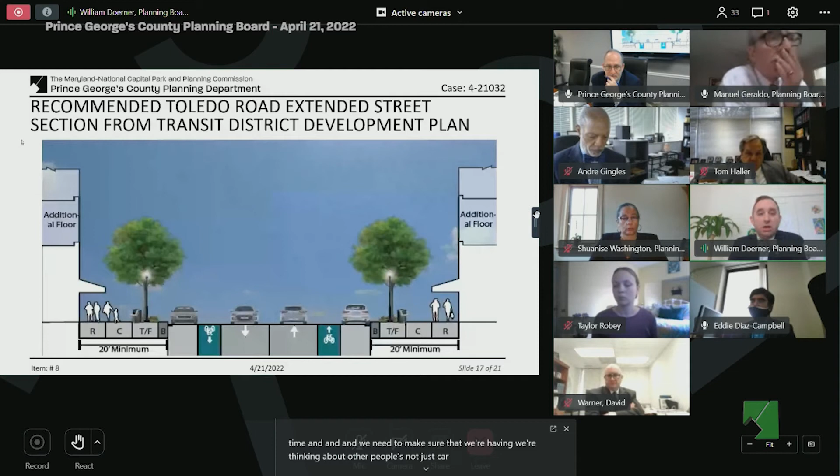I appreciate your comments, and I share them. I'm quite familiar with this area, and I have lots of the same concerns and questions. One thing to note, since this will become a City of Hyattsville road, the representative of the city may have some thoughts about this as well, even about how we approach this in the interim, as you're describing. So when we get to that, I'm curious to hear her thoughts and reactions as well.

Okay, and I'll pause there. Chair, talk about it then. You're okay, Commissioner Doerner? I do have a question.

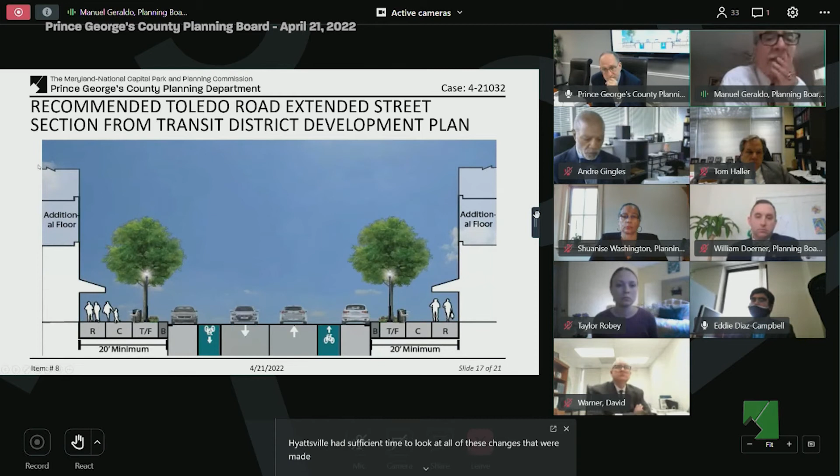Commissioner Geraldo. Yeah, just real quick, has the city of Hyattsville had sufficient time to look at all of these changes that were made in the conditions? That's a concern I have.

Mr. Haller jumped in, saying: I just want to let the board know that I did transmit copies of the revised conditions that were worked out with staff to the city yesterday. They indicated to me that they were in agreement with them, but Ms. Robey is on today as well and can also address you. Okay, thank you, Mr. Haller.

Thank you. We'll come to that in a minute. Thank you, Commissioner Geraldo. Other questions from commissioners? I have a few.

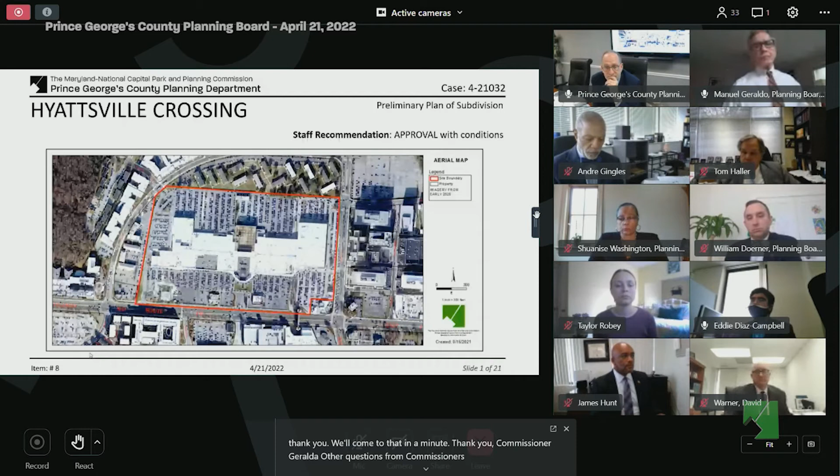I'm curious about, Mr. Diaz-Campbell, the intersection of, I mean, the short of it is along Toledo Road on the back. It's not a safe place right now. And one of the big problems is there's a bunch of fence cut-throughs from the neighboring property. I know that's not the subject property, it's the adjacent property, but what it leads to is people in a very invisible way, because of the landscaping and fencing there, folks step into that roadway all the time.

And I'm wondering how much that was a part of this discussion. I'll ask you first, Mr. Diaz-Campbell, but I'll come to that with the applicants as well, and how you plan on addressing that with what's in your control.

So I would not say it was a large part of the discussion. Those crossings are also a temporary condition, and we would expect that in the long term that northern property will also redevelop. And when it does, it would have to provide the same sort of frontage zone that this project is going to provide along parcel 2. So that includes the buffer zone, the tree and furnishing zone, the sidewalks, the sidewalk clear zone. So in the long term, you get a sidewalk parallel to the street rather than crossings with no crosswalks that just dead end in that street.

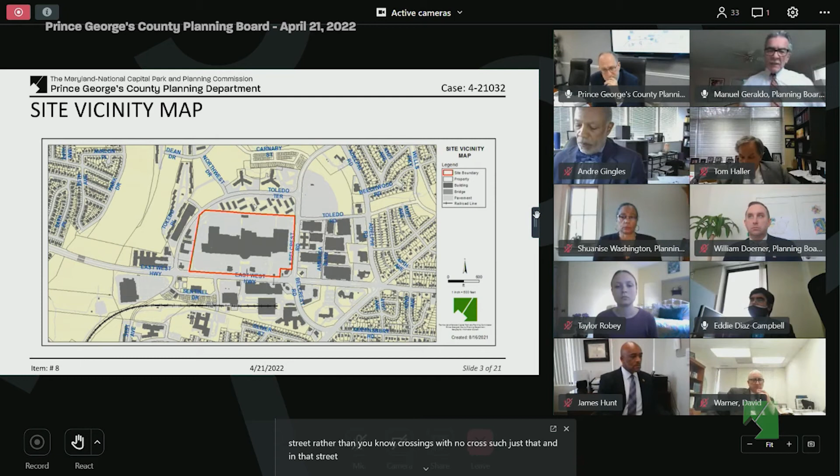So I'd like to see some kind of, through this process, temporary solution, just as Commissioner Doerner was talking about, with perhaps a slightly more robust temporary solution with the bike safety, but the same thing with the pedestrian safety. I'm thinking specifically of folks coming in and out of the garden apartments off the back, because as we make this road more automobile friendly as well as bike friendly, we may really be setting up the pedestrians coming off the backside for an even less safe situation. So I'll leave it at that.

I want to hear what the applicant has to say about that too as we move forward. But let me see if there's any more questions for staff from my fellow commissioners.

Okay, hearing none, I will turn it over to the applicant. Would you like the representative of the City of Hyattsville to go first, Mr. Haller? How do you want to proceed?

Oh, thank you, Mr. Chairman. I'll proceed first, and then we can have Ms. Robey address the planning board. First of all, thank you very much for the opportunity to speak. Thomas Haller on behalf of AvalonBay. As with Mr. Gibbs and Mr. Tedesco, Mr. Chairman, I'd like to welcome you to the planning board. I'm looking forward to working with you and presenting cases to you as we move forward, and congratulations.

Thank you, sir. The subdivision application before you today is actually the first step of truly making the mall at Prince George's a mixed-use development. I'm excited today to be representing AvalonBay. AvalonBay is a great partner in beginning this journey. They are the 15th largest publicly traded real estate investment trust and have been on the S&P 500 since 2007. It's a vertically integrated company, meaning they not only do the in-house development planning, but they also construct the project and manage it once it's constructed. So they're a good partner to start the introduction of residential uses around the mall property.

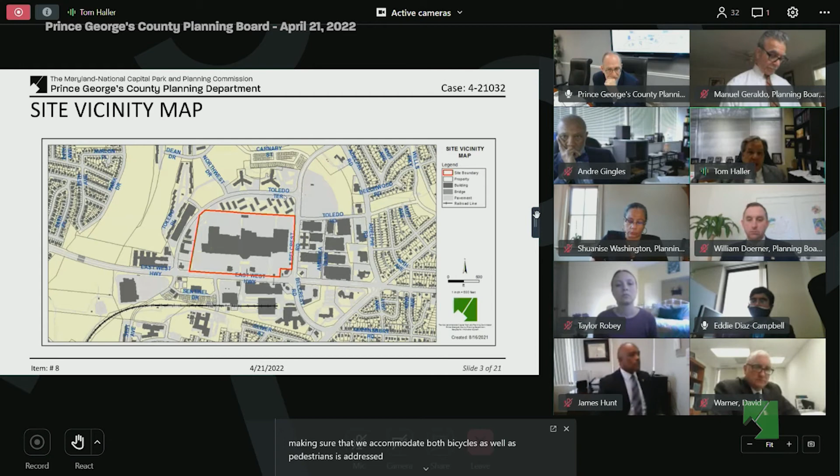So what I would suggest to address Mr. Doerner's concern is that maybe we add a finding that at the time of detailed site plan, we provide a copy of a plan showing how it's going to be restriped and addressed, so that your concerns about accommodating both bicycles and pedestrians are addressed in the interim restriping and not just in the future condition. I think that would give us an opportunity to take a closer look at it.

Keep in mind that AvalonBay does not own the overall mall. Andre Gingles is here today representing the owner of the mall, which is PREIT, and he can speak to this as well. My suggestion would be that the striping plan also take into account accommodating bicycles by more than just putting sharrows on the existing mall pavement.

And with regard to Commissioner Shapiro's question about the northern property line, I think the fencing is actually on the adjoining property, and the openings in the fence are probably self-created by residents of that development. I think we can work with PREIT to find an interim solution, maybe a fence that we would control. I know the goal over time is for that property to redevelop and create a new street with buildings on either side, so it would not be a permanent solution by any means, but that's something we could look at the time of detailed site plan to see if it might be possible.

And so I would think that maybe a finding that would ask us to explore the possibility of doing that, to make sure that we can do that in a manner that is respectful of property lines, but also doesn't hinder any of the long-term goals of the mall. I think we can address both of those comments as we move forward, as this is just a preliminary plan of subdivision, and we can address those as we move forward. I'm going to stop at this point and offer to answer any questions you have, and give you an opportunity to hear from Mr. Gingles and Ms. Robey as well.

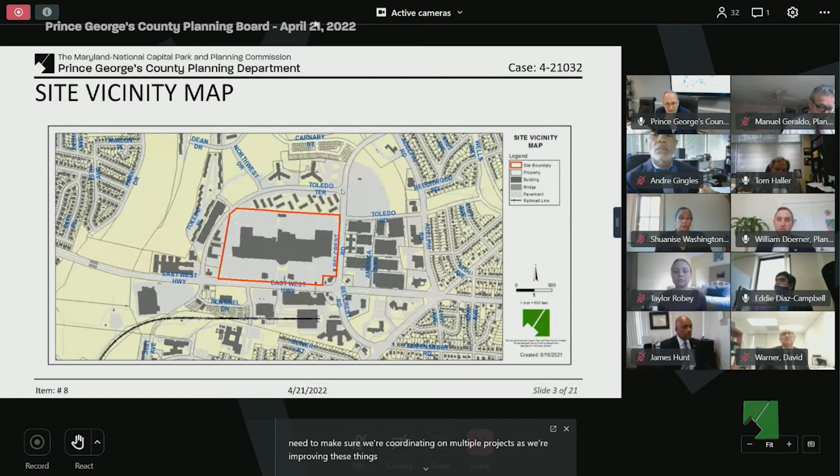Okay, Mr. Haller, we're going to turn to Mr. Gingles and Ms. Robey. Start with Mr. Gingles.

Morning, Mr. Chairman. First of all, congratulations, welcome aboard, and best wishes for a great tenure. Thank you.

Pennsylvania Real Estate Investment Trust is the owner of the mall. We appreciate working with AvalonBay and others, particularly your staff, in getting to where we are today. I would concur with both suggestions Mr. Haller made about looking at how, as part of the DSP, to implement additional measures to make both the biking and the crosswalks a bit safer. One option could include interim fencing along the mall property. I do think, as the commissioner indicated, those crosswalks were there to bring traffic into the mall, and we do want that. Over time, as development occurs along there, with buildings going up and using the established crosswalks, it will end up directing more people directly to those crosswalks, because there will be buildings there and it won't be as easy to just cross anywhere along the street, which will probably enhance safety. With that, we agree with the revised conditions, which have taken into consideration the concerns raised by the owner. Other than that, myself or Mr. Dan Pascal, who's also on the line, can answer any additional questions.

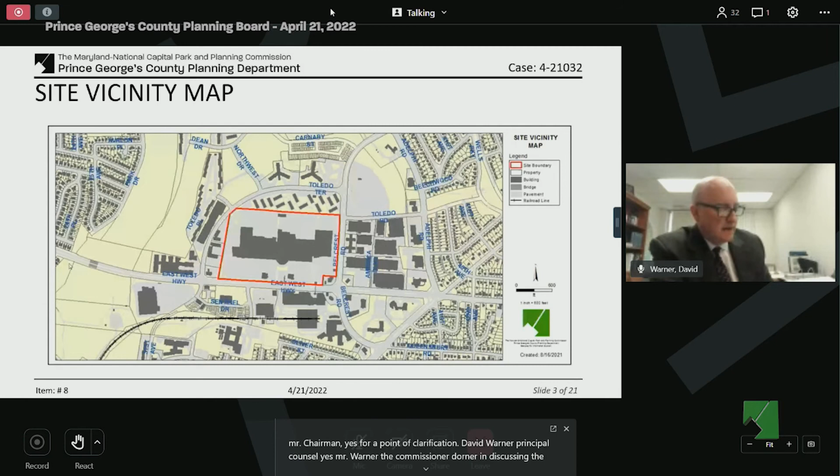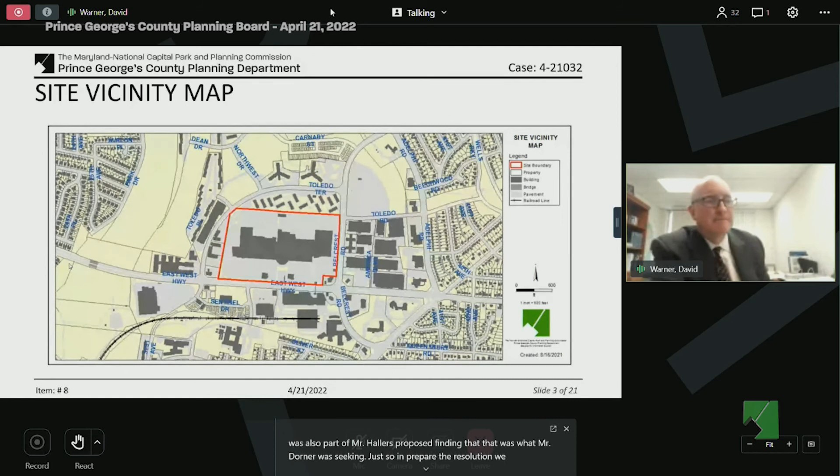Commissioner Doerner, in discussing the improvements appropriate for Toledo Road Extended, mentioned that painting at least reflectors would be better. The finding Mr. Haller offered was to bring forward the restriping and painting improvements as part of the detailed site plan, but it didn't mention reflectors. I wanted to clarify if that was also part of Mr. Haller's proposed finding, that that was what Mr. Doerner was seeking, so that when we prepare the resolution we accurately reflect that. Thank you, Mr. Haller—any objection to including reflectors in that condition?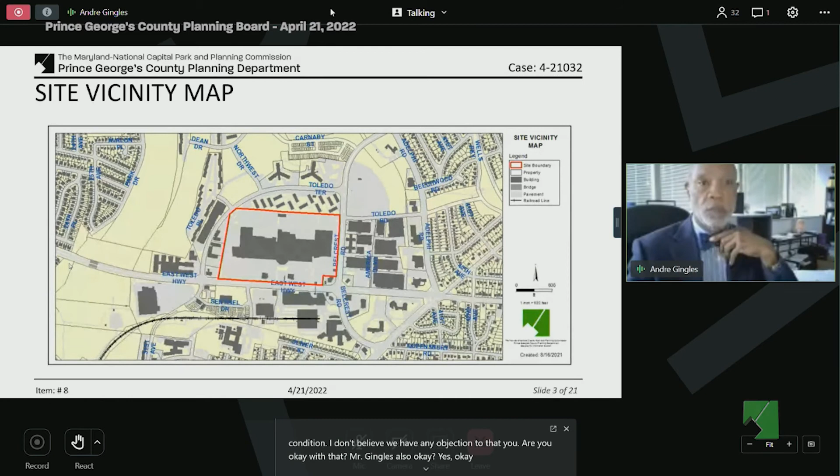No, I don't believe we have any objection to that. Are you okay with that, Mr. Gingles? Also okay, yes. Okay, all right, let's consider that as part of the conditions. Thank you, Mr. Warner.

If there are no further questions, I want to thank everybody. Let me turn it over to my commissioners to see if there is a motion.

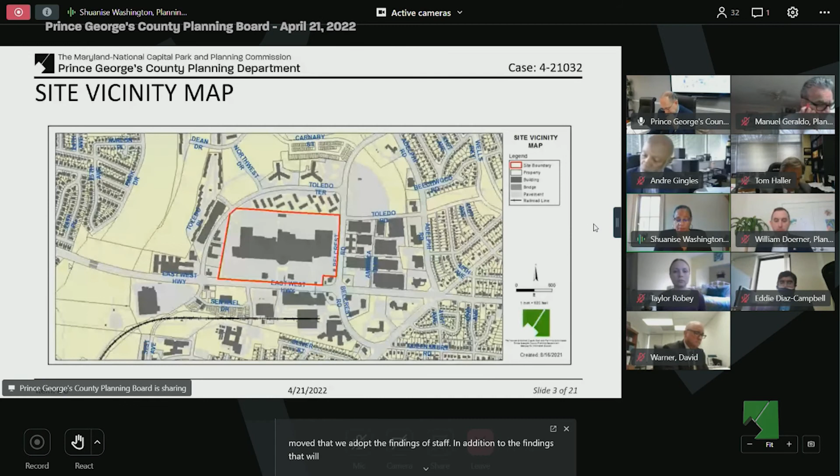Mr. Chairman, I move that we adopt the findings of staff, in addition to the findings that need to be modified as a result of the changes in conditions, and in addition to the two findings offered by Mr. Haller regarding safety of pedestrians and cyclists, specifically to include reflectors and striping. With that, I move to approve preliminary plan 4-21032 and variation from section 24-121A3, along with the associated conditions as outlined in staff's report and as modified by applicant exhibit number 1, and as further modified by staff and read into the record as follows.

Condition number 1A and condition number 10 shall remain as originally presented in staff's report. Condition 13, as well as the sub-bullets, as read into the record by staff. Condition 14, as read into the record by staff. Condition 15, as well as the sub-bullets, as read into the record by staff. And condition 16, as read into the record by staff.

Thank you, Commissioner Washington, thorough as always. Is there a second to the motion? Doerner seconds—we have Commissioner Doerner with a second. I think we had Commissioner Geraldo with a muted second, but Commissioner Doerner beat him to the punch. So we have a motion and a second. Any discussion on the motion?

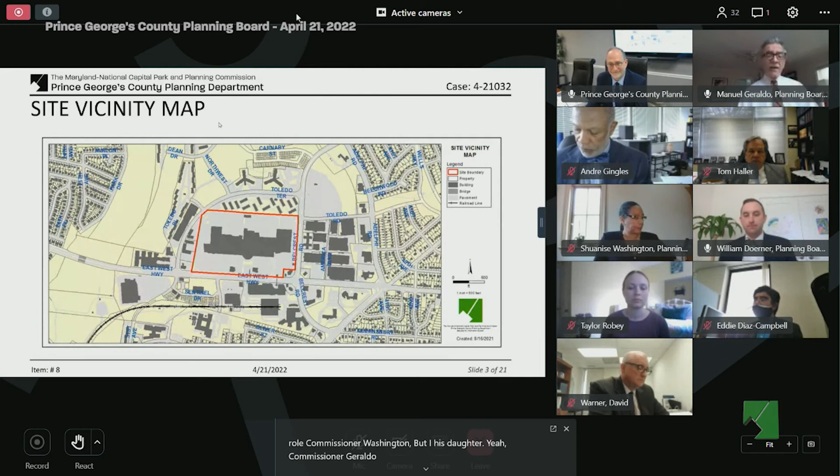Hearing none, I will call the roll. Commissioner Washington, vote aye. Commissioner Doerner, vote aye. Commissioner Geraldo, vote aye, unmuted. We have an unmuted aye, and I vote aye as well. The vote is 4-0. Thank you all very much.

Let me just pick up on where you started, Mr. Howard. This is a very exciting project, an example of really quality infill development. It has the potential to be quite transformative for the city and the region. This has been in the works for many, many years, and I'm personally very excited to see us moving in this direction. Thank you all very much. Have a great rest of your afternoon.

Thank you. Thank you. So we have one more item on our agenda.

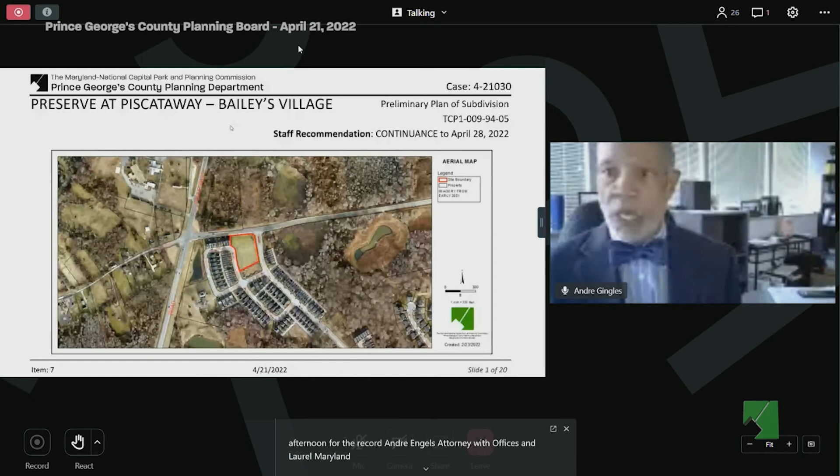So the revised recommendation also accompanies a set of responses to the proposed conditions by the applicant, as well as a new condition. With regard to the revised recommendation, we disagree only with the suggestion of a continuance. We cannot, and actually we're on this date because some months ago I did express to Mr. Diaz-Campbell that I was going to be out of the country. The continuance to the additional date, which would be at the end of the 70-day period, causes issues in that it would mean that our preliminary plan would either be automatically approved with no conditions, and that's typically not what the planning board does. Being out of the country has been long planned; it's nothing that I can reverse at this time.

Secondarily, we would note that notwithstanding what the district council may do, and we do understand that there was a request for the preparation of the order of disapproval, we're not sure what action is going to be taken on that. But your existing recommendation, as well as the revised recommendation, included a condition number 9, which does address if the district council should do anything different than approving the comprehensive design plan as was previously approved by the planning board. For those reasons, and the fact that you've made the findings in both the original and the modified staff report that are required for the approval of the preliminary plan, we think it's detrimental to the applicant for us not to be able to go forward within the statutory time limit that's allowed. We will have various rights that we can pursue depending on what the district council's action is.

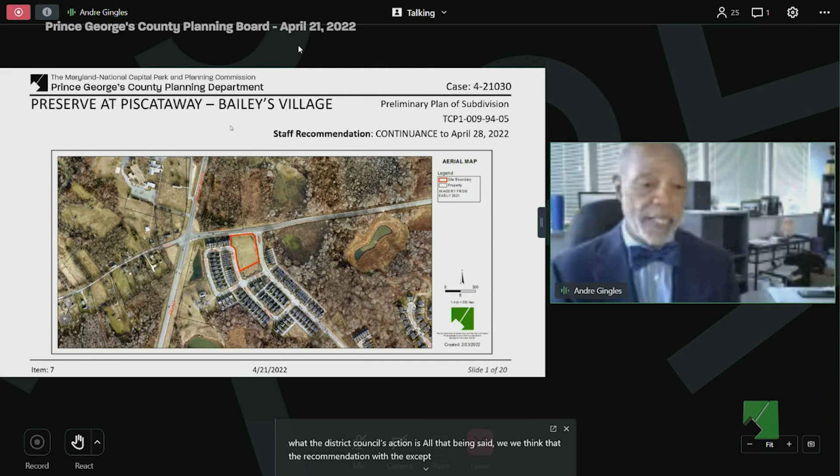All that being said, we think that the recommendation, with the exception of the continuance, continues to protect the planning board, and at the same time the only risk is really upon the applicant. For that reason, we ask that the revised recommendation with those conditions as proposed by the staff be adopted and the preliminary plan be approved.

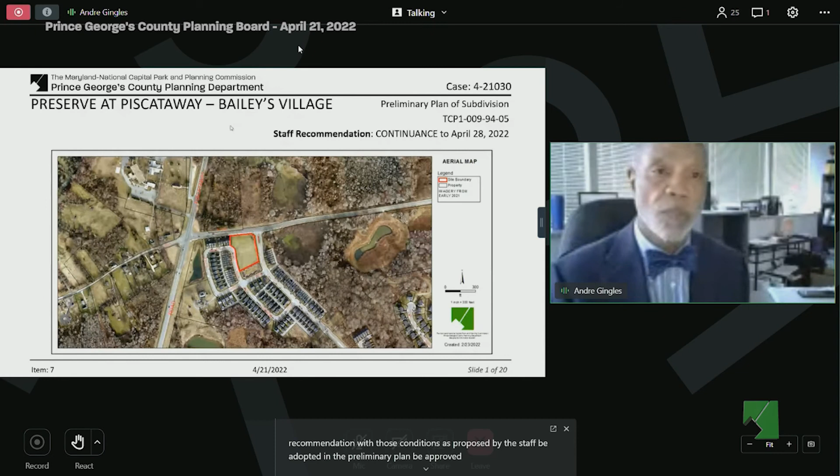Thank you, Mr. Gingles. So let me start, commissioners. I think it's hard for me to imagine that it is in our best interest to move forward without complete information, without hearing from the district council. And I also hear you, Mr. Gingles, around this issue, it's a reality. You have this scheduled vacation. You're not going to be there.

It's not in the interest of the client to move forward without your presence. My understanding is that we might have another option here too, which is with your support, and Mr. Warner, you can help me with this, but with your support, if you request an additional extension, a waiver for another 70 days, then that solves that problem. Because I imagine we will be fine with that, and then that will provide you the opportunity to participate. But I don't

believe that we should move forward unless we have all the information before us. So first of all, let me ask you, actually, let me see before I even ask you, Mr. Gingles, let me just check with my fellow commissioners if that's okay with Mr. Gingles, is that okay with you?

I wanted to hear from Mr. Warner, so I'm glad that you spoke with him. I'm fine with continuing this case, provided that meets Mr. Gingles' wishes. Okay. Yeah, and I was going to defer to also hearing from Mr. Warner, because I think as Mr.

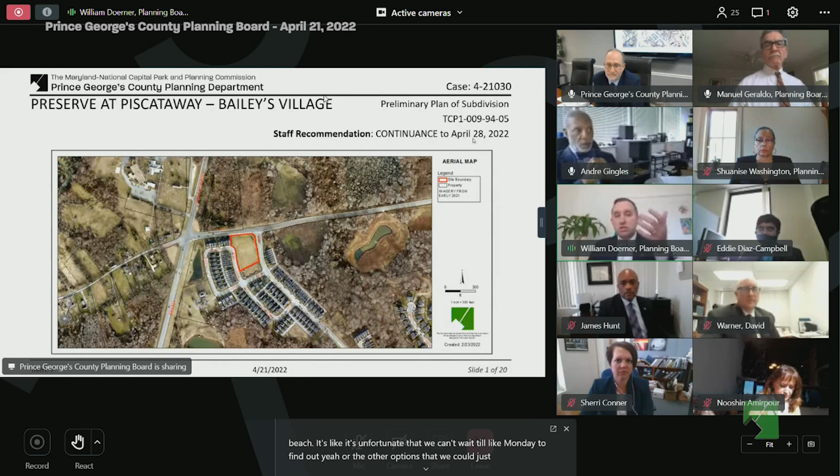Or the other option is that we could just hear the case, go through all the motions as if we're going to assume that this will be allowed, and then recess it until next Thursday, as with the rules of procedure in section 6. And then we could take the vote, and as long as there's no big impact, then Mr. Gingles doesn't have to worry, he doesn't have to be here, and that would be our final thing. That would also give us an opportunity to add in any other minor conditions we want to add.

Well, I see that Ms. Conner's on, so I'd be happy to have her provide her perspective on it as well. But again, I don't think that's appropriate.

You're trying to find that this preliminary plan conforms to a CDP that will likely be reversed in 3 or 4 days. You know this, and yet proceeding now and then trying to add a condition that says, well, if the CDP gets reversed, then such and such will happen, is not the best approach, especially when the subdivision regulations have a process that makes it very simple to just have this hearing May 5th, whatever our next date is in May. It's merely an extension of time of 2 weeks to make the decision with the most information when Mr. Gingles can be there. So I don't think I would advise moving forward on this application against staff's recommendation.

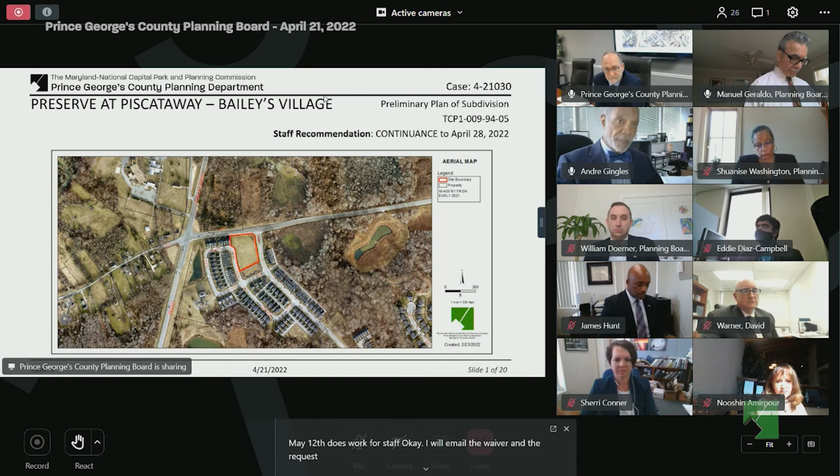Let me ask staff again, do we as a commission, as a board, need to take some action related to accepting this request for waiver? Yes, we do, to move for the continuance. So the motion is not for the waiver, the motion is for the continuance. Correct. The motion should be for the continuance conditioned on the submission of a written waiver to May 12th. So that's the language of the motion. Is there a motion?

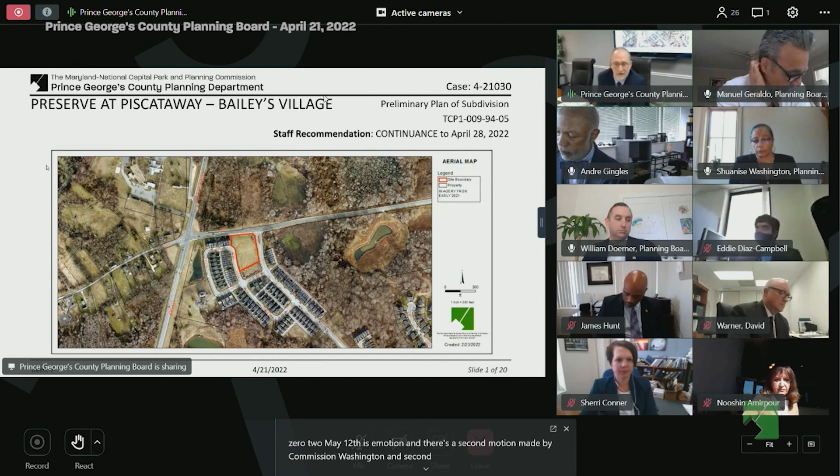Mr. Chairman, subject to receipt of the written waiver, I move that we continue preliminary plan 4-21030 to May 12th. Second. Thank you, there's a motion and there's a second. Motion made by Commissioner Washington, second by Commissioner Geraldo. Any discussion on the motion?

I will call the roll. Commissioner Washington. Aye. Commissioner Geraldo. Aye. Commissioner Doerner. Aye. And I vote aye as well. The ayes have it. This is continued until May 12th, and we're looking for receipt of a request for the waiver.

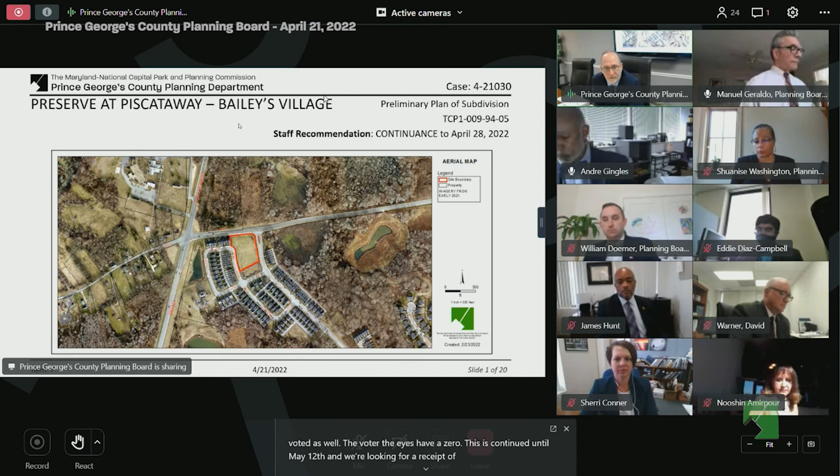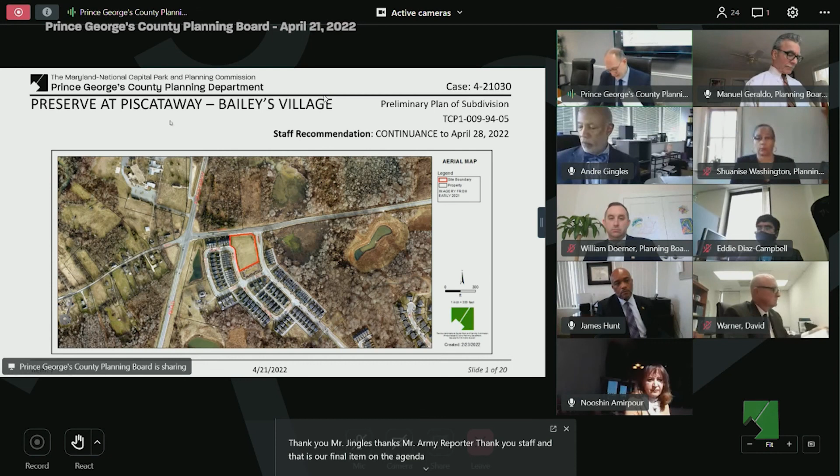Thank you, Mr. Gingles. Thanks, Ms. Amirpour. Thank you, staff. That is our final item on the agenda. I want to thank staff and others for all the work today. There's one last question, of course. Mr. Hunt, is there any further business to come before the planning board today? Mr. Chair, there are no additional business items before the board today. Thank you all for your participation, and this meeting is adjourned.